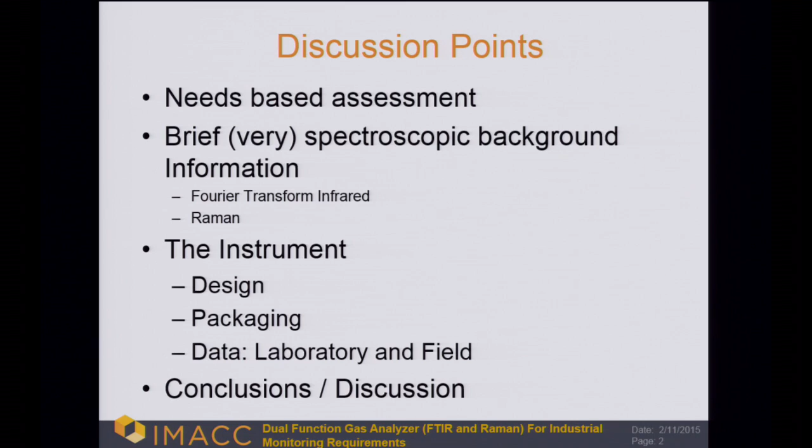We're going to talk about Fourier transform infrared and Raman, and then we'll talk a little bit about the instrumental design, some packaging, show you some data, and then we'll open it up for discussions. I was told that I don't have to worry about saying feel free to interrupt, but I'll go ahead and say feel free to interrupt, and then 3 hours from now we'll be ready to go.

So this is something I'm sure everyone in this room already knows, what the needs are. Here, nitrogen and hydrogen, our homonuclear diatomics we'll talk about. Being able to determine the calorific value, BTU, the molecular weight calculations, the density, what's going to the flare header as far as your composition, and being able to speciate a large number of gases.

Because everybody knows there are things like tunable diode lasers out there that can go after specific analytes. Is there a way to get a broad coverage of analytes in a single instrument? We believe that we can do that, efficiently and effectively, using both FTIR and Raman.

But here's what we really love to do. So whatever your concerns are, whatever your sampling environment is, whatever your analytes of interest are, we love to help you solve those problems. I like to joke that you can't come to us and look at our shelf and say, here's the UmptyQuat, this is what you need, this is all we got. We like to address each individual's needs and requirements and then meet those requirements. We're just kind of wired that way. We love to solve problems, hopefully not create any.

So I'm sure we've talked a little bit about this in this environment. There are things out there right now, flow meters and gas chromatography. I'm an optical spectroscopist, an analytical chemist by definition, but you really don't want me mixing chemicals. As far as gas chromatography, I like to refer to chromatographers as the separatists of the world, because it's separation science. I understand and appreciate what gas chromatography is capable of doing, and I'm not saying it's wrong, but we're looking for something a little bit faster and hopefully less costly in the long run.

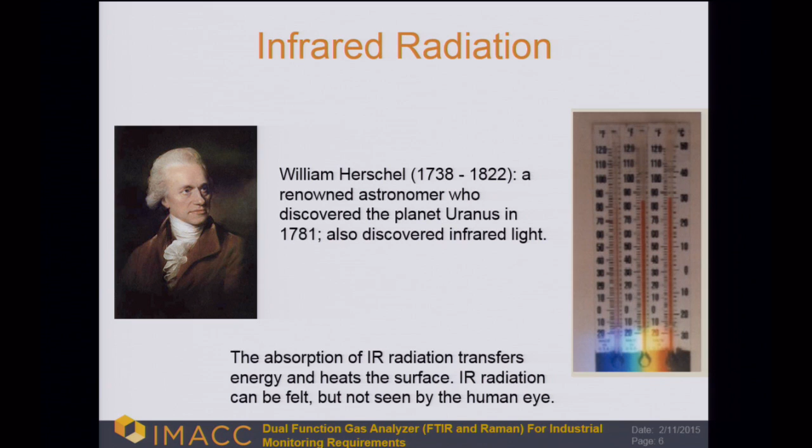So William Herschel identified infrared radiation by this simple test. We can feel it, but we really can't see it. Some people's eyes can go a little bit into the IR, but for the most part, we really cut off at the near infrared.

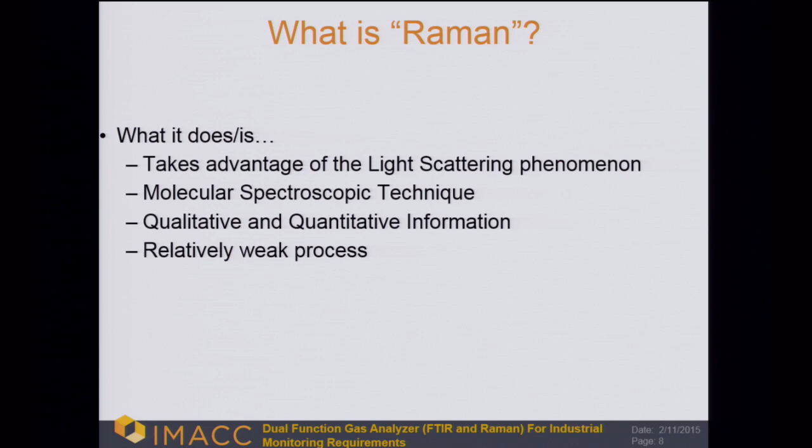Qualitative and quantitative, but it is a relatively weak process. The buzz phrase for Raman is only about 1 in a billion photons are scattered inelastically to provide that Raman information. But with today's technology, that's more than enough. Some of the data I could show you now that takes a minute used to take 3 days of continuous collection, but we've gotten a lot better in the quantum efficiency of our detectors and our laser sources.

You could have done this in 1928 and you would have won a Nobel Prize. This is how C.V. Raman actually discovered the Raman technique.

So, understanding the types of results that we get from Raman, there are 2 different main groups. One is the vibrational spectrum. The vibrational spectrum gives you your molecular fingerprint. It's very specific to each vibration as the molecules are put together.

This is cyclohexane, one of the standards I always use when doing liquids, because I know where all the vibrations are and can make sure they're calibrated. This peak right here at 801.8 is actually the ring breathing mode for cyclohexane, so it's the ring going in and the ring going out. So this is what a fingerprint would look like for a vibrational spectrum.

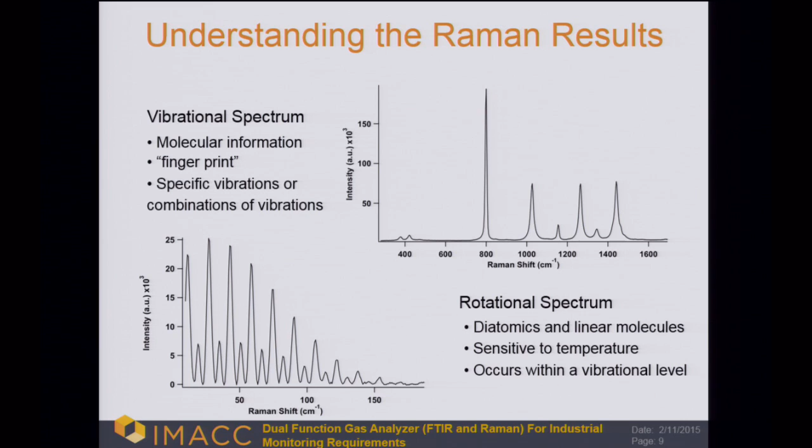With the exception of one homonuclear diatomic, and that's hydrogen. Hydrogen is unique, and it actually helps us in our quest to measure hydrogen using this particular phenomenon.

So, allowing me a little cartoonism here, if we think that FTIR active molecules are mainly asymmetric vibrations and Raman active molecules are mainly symmetric vibrations, if we have all the FTIR molecules in the world and all the Raman active molecules in the world, we will have this crescent here. And who lies in that crescent would be our homonuclear diatomics.

There is a crescent over here as well, but not relevant to this discussion, and I don't want to bog down too many details. But this is Raman only, and that's why we wanted to combine the 2 techniques together - not lose the sensitivity and selectivity of your FTIR, maintain that, and add not only these homonuclear diatomics, but this green overlap that's underneath the red of all the other Raman active vibrations, like carbon dioxide.

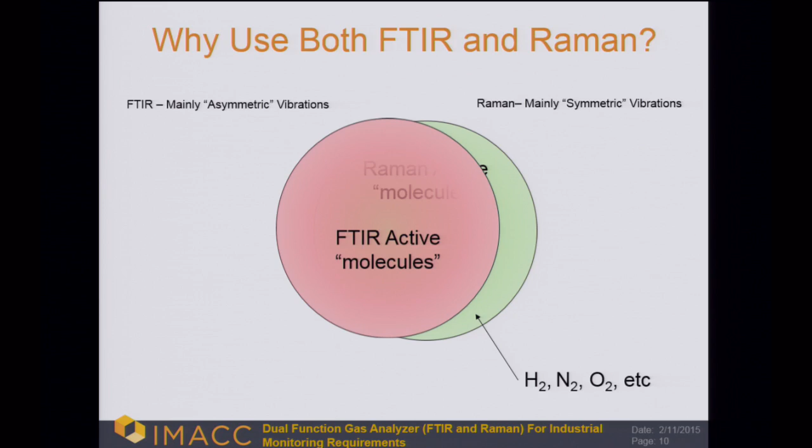So we have the technique. What's the solution? My idea was to take and steal Raman off an FTIR white cell, which is a long path cell, 10-meter cell. Not optimized for Raman, but we had them on the shelf. Can we still get Raman off of those cells and still maintain the capabilities of our FTIR using the same cell, which was the original path I walked down? One cell to do both.

It turned into this first unit, and I literally scavenged this off an instrument. I took these parts out of the trash and assembled it. And it worked. Somebody told me downstairs, sometimes the simple solution is the best solution. So get a wire brush, clean some parts off, put it together, and lo and behold, it actually works.

In this particular configuration, we were using one cell to obtain both FTIR and Raman from the same sampling volume, which is good unless in a 10-meter cell you have a high concentration of FTIR absorbing species, or IR absorbing species, because then they will dominate and absorb too much and you'll lose that spectroscopic fidelity using that cell system. So simple solution: 2 cells. That is also a possibility.

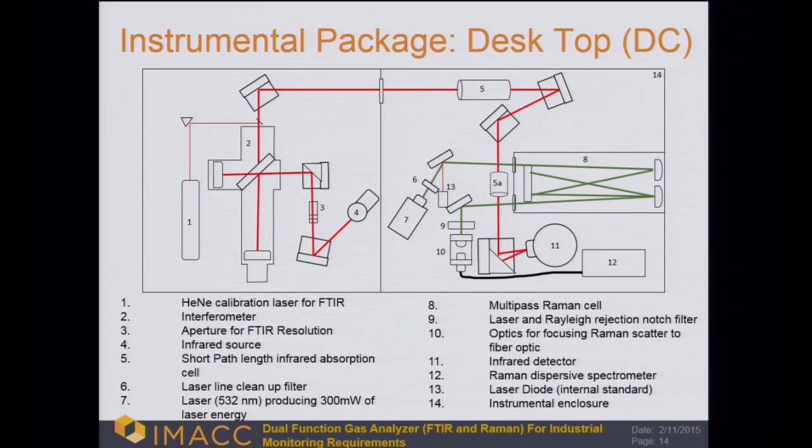So just like I always get accused of, if something works, I always tear it apart and turn it into something else and make it better. I'm never satisfied with leaving it alone, I guess.

So I took that system and put it into a rack mount system, mainly because there were some people we've talked to, footprint—it's all about footprint, right? We don't have the room for this thing to sit there. Can you make it vertical? Yeah. So can you make it class 1 div 2? Oh yeah, I think so. First step is to get it vertical.

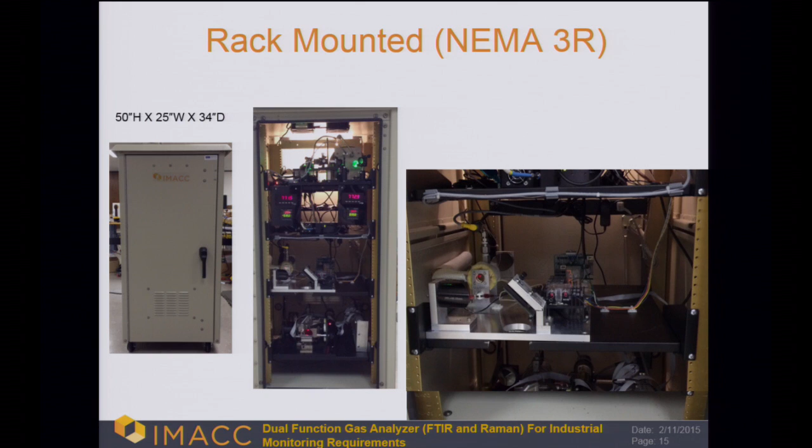So now we have this instrument downstairs. This is a 3R, NEMA 3R container. Each individual shelf has a component. The bottom shelf has my FTIR modulator and the electronics to drive it. The second shelf has my FTIR cell. Right now it's about a 5 centimeter cell for the high concentration application.

Our third shelf is electronics and gauges. You have individual temperature and pressure for FTIR and Raman, spectrometer, even a little computer. I don't know if y'all seen these little computers nowadays, they're phenomenal, only about yay big. It sits right back there and runs the whole system. There's one plug that comes out of here, plugs into the wall, and it's self-sufficient.

Up top is where all the Raman happens: your Raman laser, your internal standard laser, the Raman cell, fiber optic taking it down to the spectrometer.

And believe it or not, I don't have a degree in U-Haul moving, but have you ever walked across those ramps at a U-Haul, like 7 billion ridges per square inch, I don't know why. But we actually rolled this across there, rolled it in, put it up, and started it up, and no change in calibration whatsoever, no shifts at all, which I was very happy for. I expected to get some shifting, but just powered it up and she started rolling with no problem.

So what does the data look like coming off to the user? I love this slide because it helps illustrate the difference between an IR vibration and a Raman vibration, since this is collected simultaneously. On this side is my IR, and on this side is my Raman. You can see I've taken the background—there's my background single beam, and there's my absorbance spectrum. My FTIR has no clue that anything is in the cell right now.

I am flowing 100% nitrogen, so there's my Raman nitrogen peak at 2331, while FTIR does not see it. This is just the way I like to illustrate the selection modes or criteria for the two different techniques using this particular slide.

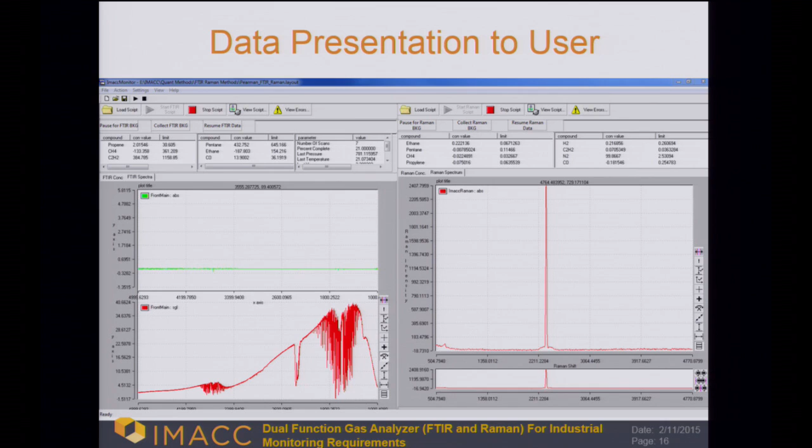So, great, it works. It works. Can we then prove it works using more laboratory data? Well, these are some of the analyte sensitivity graphs for the hydrogen, oxygen, and nitrogen.

And you actually would expect this deviation in the slopes because there's a thing called a Raman cross-section, which is a contributor to the strength of a Raman signal. The Raman cross-sections - hydrogen has the greatest Raman cross-section and it goes down from there, so you would expect a greater change, like you do see in this graph.

And this also allows us to go back and make sure that our spectrometer, our laser system, and our optical paths are still operating at where we built our calibration curves, by having this as our benchmark.

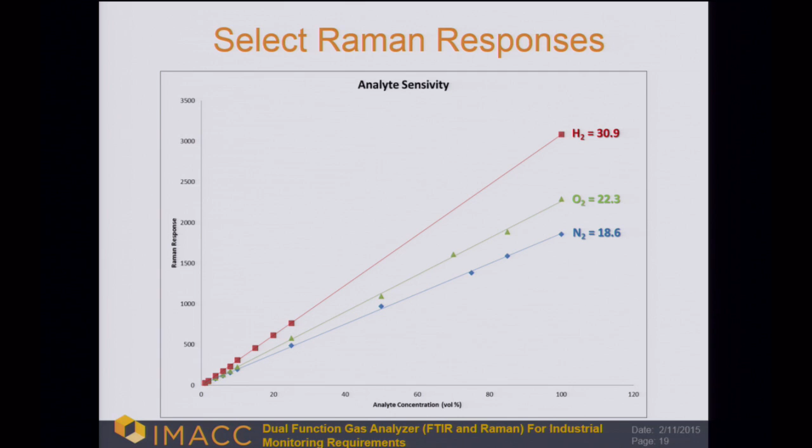So luckily, we had some friends up in Palatine, Illinois, near Chicago, and they allowed me to pack an instrument up and ship it there. They had this gas standard on hand with these constituents, and used the HOVACAL to blend the hydrogen into this, so we had a multi-component mixture going simultaneously.

We diluted it using the HOVACAL and the hydrogen to attain 5 different concentrations, and we were curious, once we built the calibration curve of the Raman response versus the HOVACAL response, to test it against the GC. That sounds great, so let's give it a shot.

So, lo and behold, if you calibrate the Raman instrument to another instrument, or in this case another capability like the HOVACAL, it gives you exactly what you would expect to see. Okay, great - you're not learning anything here. You calibrated it to what you use, so you should get the same response.

And we did. I said, okay, so great, it's working great, cold fusion - let's hold a press conference. Let's check the GC. Oy. Who put this slide in there? Okay, so what did we do wrong?

We did something wrong, but still, it's 0.96 to 0.99. Yeah, I'm saying that's pretty good. Trying to make ourselves feel better.

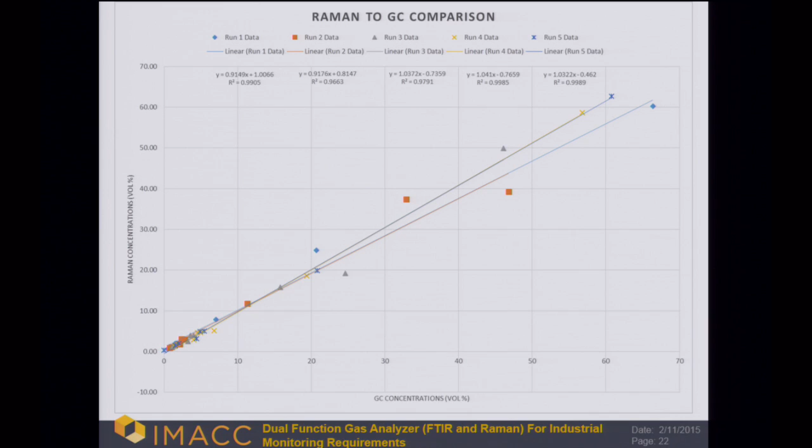There you go. But we actually found out that the calibration for the HOVACAL with the hydrogen was off. So we went back, redid the data, and ran it again, and lo and behold, that looks a lot better - 2 nines, not bad. So we are at least as sensitive and selective, I believe, as a GC. It looked pretty good.

So I said, okay, all these people have all these GCs, well, they don't want to get rid of them. So what if you used a GC as your QA/QC check, and then let the Raman run? You only run your GCs every once in a while.

And if you do that, okay, same thing as before, it does seem like a viable opportunity for you to check and maintain your response from your Raman FTIR system.

Now, why would I need that if I got the GC? Because I'm collecting data every minute or 30 seconds, depending on your concentration levels, and I don't have to change my columns because I don't have any.

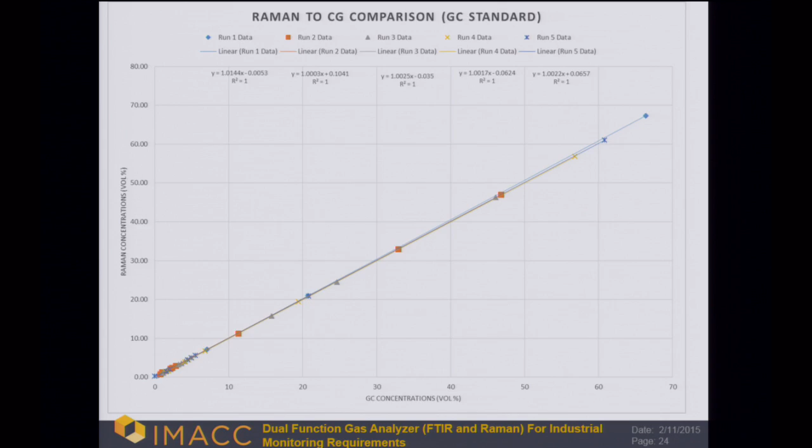So, great, it worked in the lab. I've almost convinced you it works. Then we take it out into the field, in what I call the shakedown cruise.

You see the same species every single one: carbon monoxide, HCN, methane, water, ammonia, not hydrogen, in the FTIR spectrum. You do not see the hydrogen, the nitrogen in the FTIR spectrum.

So this is what I was talking about before. Hydrogen is one of those unique species where you have easy access to the rotational lines as well as the vibrational line. And that does a great service to us using a TE-cooled detector, because the response curve of most of these detectors is kind of a parabolic curve. And these guys are at either end of the curve, so it allows you to flatten out your QE or your response by ratioing and analyzing either side.

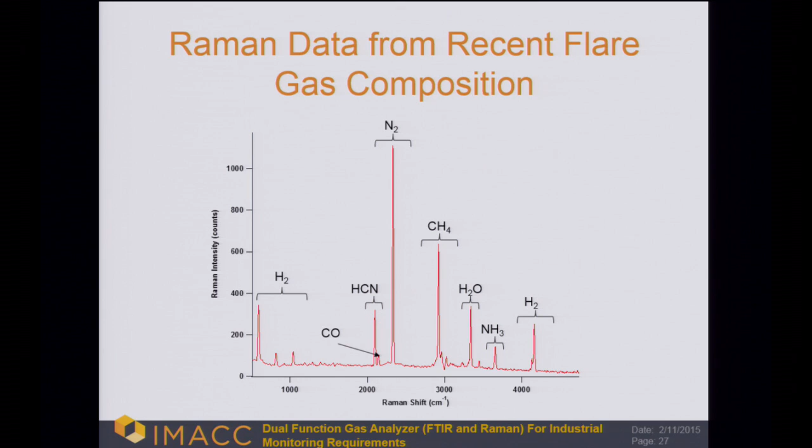Okay, conclusions. We did have a theoretical design. We did test it on bench, laboratory, and a field environment. We have a couple more planned to go out there and use this instrument some more. It does provide some interesting capabilities - again, 1-minute time average data coming off the instrument, or less, depending on concentrations. And it does allow us to monitor and measure all species simultaneously.

Now, what I will say, because it may come up, is Raman sensitivity. What you're going to get as far as limit of detection using the Raman only is about 0.5%. It's probably the best we're going to achieve right now. With FTIR, it's in the low ppms.

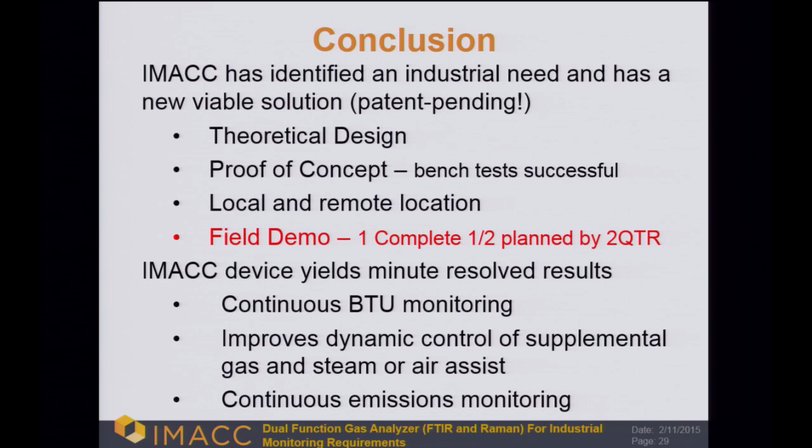So that can be improved. I can go lower on the Raman if I was to build a Raman-specific cell, which I had the designs for, just hadn't really put it together yet. So when it comes down to 0.5% or 1%, I was told that really that's not a big deal. So if it is a big deal, we do have the capability of going lower - I just don't know how low we can go.

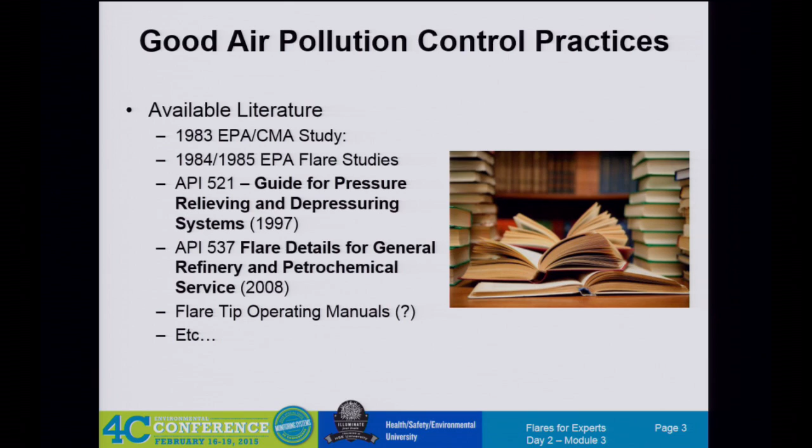When you look at how do you determine flare performance, you have a couple of obvious choices. Visible emissions.

Oddly enough, a smoking flare is not an inefficient flare. A smoking flare is actually a highly efficient flare in terms of combustion efficiency and destruction removal efficiency. Those are the other two factors you can look at for flare performance.

But how do you measure those? In theory you can look at a flare and tell if it's smoking or not, but how do you measure combustion efficiency? How do you measure destruction removal efficiency? We've talked quite a bit about a smoking flare already, so I'm not going to go too in-depth into that.

But combustion efficiency - when you have a flare, you have an open flame in the atmosphere, you can't really measure the emissions coming off of that. So that leads us to this concept of surrogate parameters. That ranges from exit velocity based, where you see the tip velocity we've been talking about in Subpart A, and also this concept of momentum flux ratio that's in the consent decrees, and fortunately not in MACT CC.

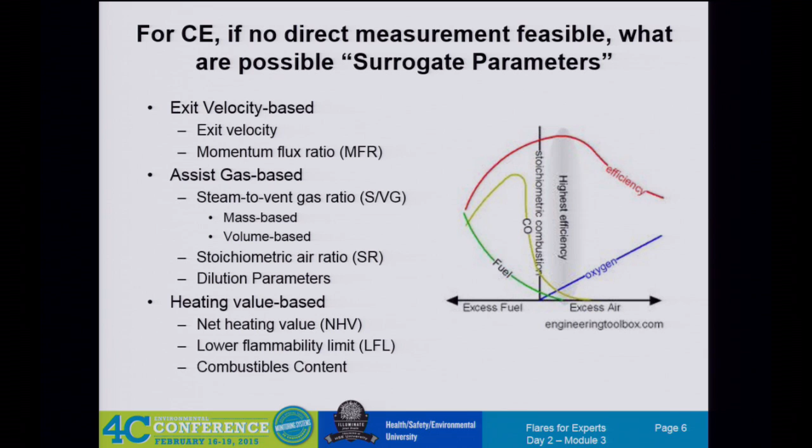You have assist gas based surrogate parameters, and those are your steam to vent gas ratio for your steam assisted flares. The consent decrees and the OAQPS document introduced this concept of the stoichiometric air ratio, and then MACT CC introduces these dilution parameters that were kind of totally out of left field when that was published. And then you have your net heating value based parameters, which is the net heating value, the lower flammability limit, or your combustibles content as we see in MACT CC.

As far as exit velocity based parameters go, these are based on studies from the 80s, and there are concerns about the scalability of the test. These were done, some of the studies this information is based on, were more or less Bunsen burners. So their scalability to large industrial flares is questionable.

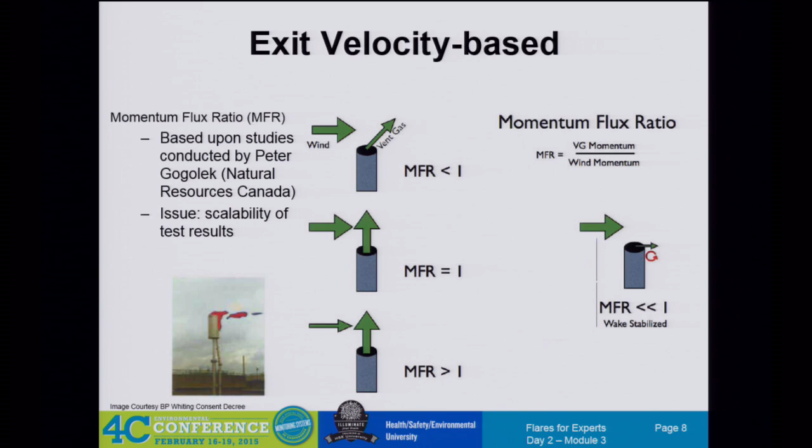Hopefully this will be the only time I talk about MFR. This is just the evolution of the exit velocity-based surrogate parameters, and the numbers here are somewhat nonsense because the MFR limits set in the consent decrees are actually 0.0030. So calling MFR greater than or equal to 1 is somewhat nonsensical.

But combustion efficiency - now combustion efficiency looks at the effectiveness of turning the hydrocarbons in your flare vent gas stream into carbon dioxide. So in the numerator, you have your concentration of CO2. In the denominator, you have your concentration of CO2, CO, and your unburned hydrocarbons in the plume. So that denominator constitutes all of the carbon that should be in your vent gas stream, whereas the numerator just looks at the carbon that's been fully oxidized all the way to carbon dioxide.

Whereas destruction removal efficiency looks at - if you had 10% propane and you measured only say 1% propane in the plume, that would be a 90% destruction removal efficiency. It doesn't matter what that 90% of propane that disappeared went to. It could have gone all the way to carbon dioxide, it could be CO, it could be random other hydrocarbon species in between. All it cares about is that it's not propane anymore.

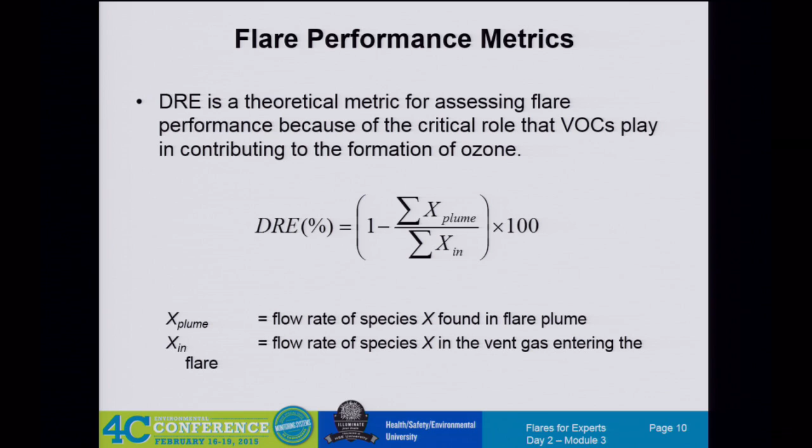You just talked about the destruction efficiency - yeah, the two different terms there, destruction efficiency and combustion efficiency. And from the regulatory perspective, how do those fit in? Well, the goal is 98% combustion efficiency. And oddly enough, we talk about this a little bit in the AP 42 module that we may or may not get to this afternoon.

But in the changes that have been made to AP 42, the EPA has actually shifted the emphasis from destruction and removal efficiency to combustion efficiency in one of the spots. So that's been the shift towards that.

It shows up in your permits because over the years we weren't that precise with our words, right? So some permits use combustion efficiency, most use DRE, destruction removal efficiency. They just use the acronym DRE. Really, it only should apply now to an incinerator, a thermal incinerator, some type of incineration device where I'm adding fuel, creating a firebox, and trying to destroy what I'm sending through that incinerator. We have to work at keeping the distinction.

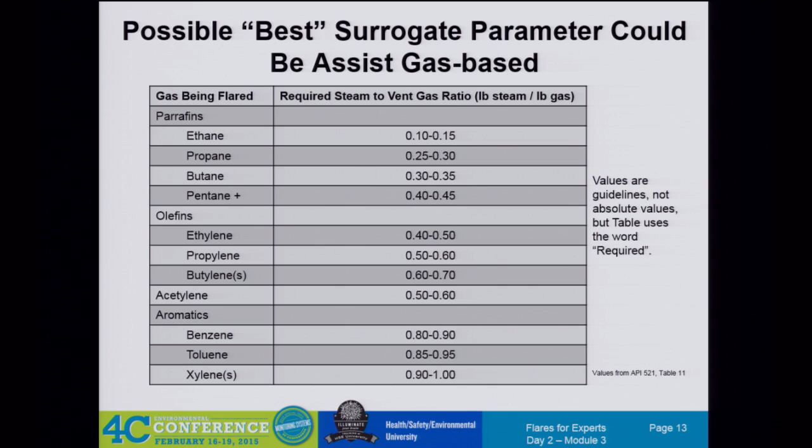Is anybody on the API committee just to help change that word? It boggles my mind after all these years that we still can't seem to get API to change 521.

Well, it's interesting, if you see the word 'required,' you have to ask required for what? EPA will say, well, since it's required, if you're over this, your combustion efficiency is affected. Well, this isn't about combustion efficiency, this is just about smoking, this is visible emissions essentially.

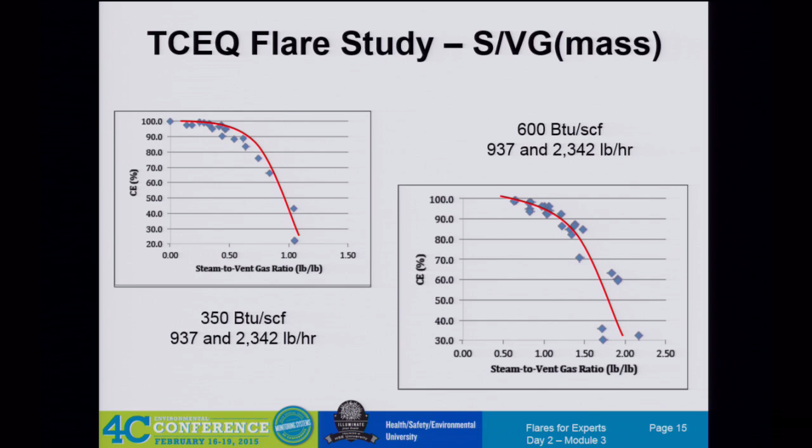When we turned the steam off at 350, it did smoke, to my surprise. Yeah, because it is a pretty large diameter flare. So, but at minimum steam, it was 46%. And then on the 8-inch flare we did at 300, it didn't smoke, it was marbled. So it just depends on the flare size and the dynamics of what's going on.

So let's see, again, we've talked about this already, but the goal is to operate as close to that incipient smoke point as possible, because that's the most efficient point of combustion. You get excellent combustion efficiency right at that point.

In addition to the steam to vent gas ratio, you also have the stoichiometric air ratio that OAQPS has talked about. It's a direct mass to mass ratio, looking at the amount of air supplied to the flare tip and the amount of oxygen in that air supplied to the flare tip.

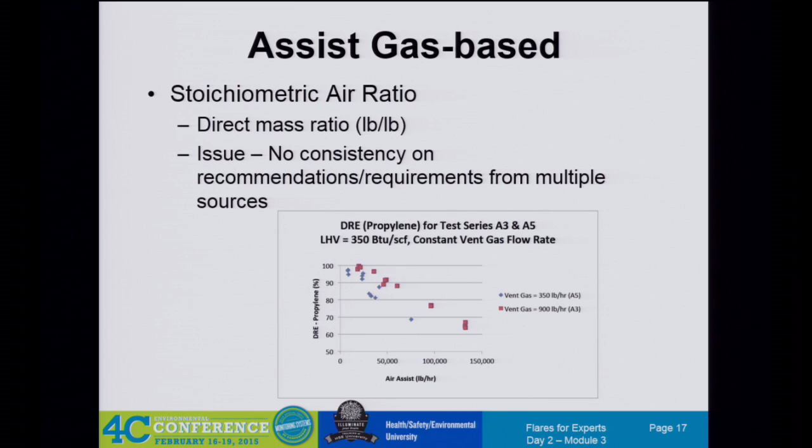Those are the wrong units, sorry, BTU per scuff in there. Obviously premix air. I'm kidding, I don't know what premix air is. I don't know, Russ, did you guys use premix air for that? I don't know. Nobody sees what that was. Yes.

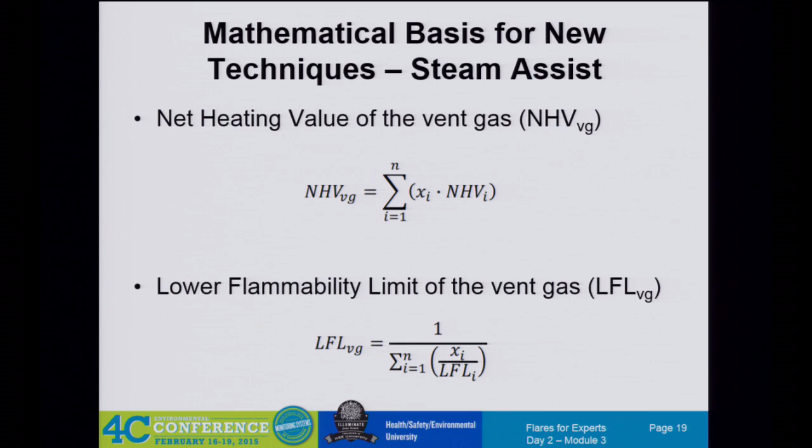Okay, we've talked about this drawing already, the various spots you can look at the net heating value of the gas. Now we're going to walk through some of the equations. Most of you will have seen these before, so we'll go quickly. First is the net heating value of the vent gas, which is the summation of your various components in the vent gas and their individual component net heating value. Then you also have the inverse of that, which is the lower flammability limit of your vent gas, which takes the composition, divides by the LFL of their components, and then sums that under 1.

One other thing to note is the 2 different heating values for hydrogen. 274 is the actual net heating value of hydrogen. 1212 is the effective heating value of hydrogen, which takes into account the flame speed of hydrogen and the fact that it burns well and tries to boost the combustion of the hydrocarbons.

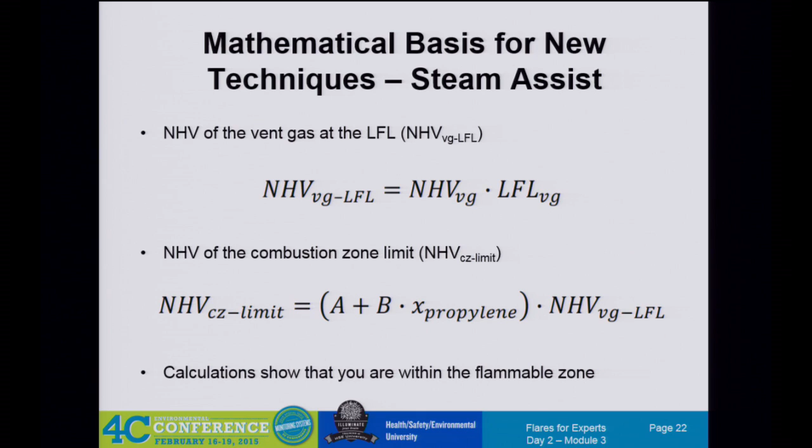It's not quite the right slide.

Next slide. But anyways, those combustion multipliers are in part based on this propylene hypothesis, and we've touched on this a couple times. This is the idea that especially when you have olefins and hydrogen in the same vent stream, stable intermediates are formed during the combustion process, and this prevents complete combustion.

When does this slide come back to bite us all in the ass? Yeah, we're just reporting the data. It's not my flare. Yes, it's a hypothesis. It's an idea.

More testing to come. So here are your combustion efficiency multipliers. It's based on your minimum steam addition, whether you're below 1,000 or above 1,000, and whether your VOC concentration of your vent gas is above or below 20%. It's worth noting that methane and ethane are not considered VOCs.

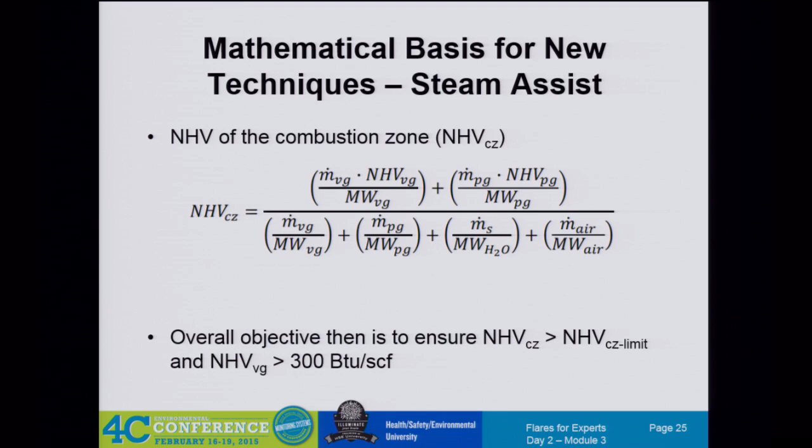Yes, these bottom two terms are the steam and air. This is fairly similar to what we've seen in MACT CC. From a consent decree perspective, your overall objective has 2 points: one is to make sure that your net heating value in the combustion zone remains above the limit you've calculated as we just went through, and the other is to make sure that your net heating value in your vent gas remains above 300 BTU as required by subpart A. Our experience is if you've got the first, the 300 is easily met - you're way over 300. Usually. There can be scenarios where that's not the case.

Has anybody argued that if you have the net heating value, you don't need the 300 in the vent gas, so we should just dump that? I don't know if anybody... The negotiator is arguing that point. Yeah, there's no reason for both. The 300, at that point, is irrelevant because you've proven the combustion efficiency at the tip.

So with future consent decrees, do you have any idea whether these calculations will stay, or will it move more toward the RTR calculation? It's a good question. Refineries are largely out of the consent decrees now, there's probably a few stragglers still to come, but they seem to have focused now mostly on the chemical side. So it's a question of whether the chemical side will differ significantly from the refiners. Chemicals might be a slightly more consistent vent gas stream because they're coming from specific units, they know exactly what it's going to be. But to this point, it's hard to say for sure.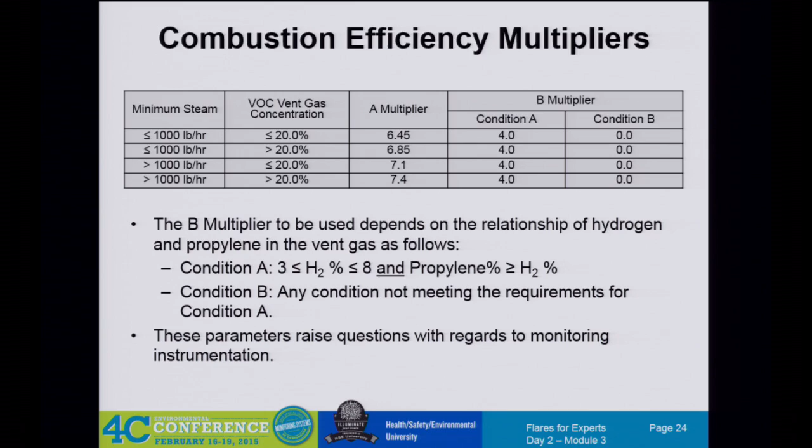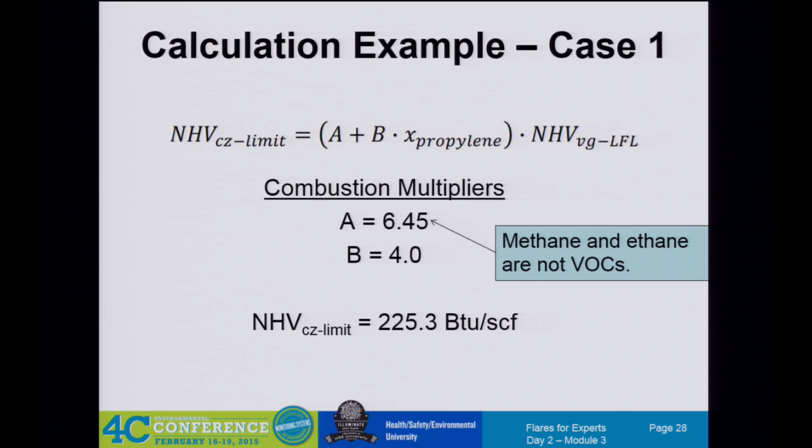Now to calculate your limit, you have your combustion multipliers here. Remember, methane and ethane are not VOCs, so that means you have a limit of 225.3 BTU per SCF. Well, except, was there any propylene? There was propane, I believe. Oh, so you don't have the multiplier then? Ah, crap, I've got a ways to go back, I guess. You have the A, or you have... Yeah, that's if your propylene is... Well, you have the A multiplier, but your concentration of propylene just falls out because the concentration's 0. Yeah, so then you're under condition B. Oh yes, so there is no multiplier. You are correct. Yes, that is correct, that should be 0. It doesn't change the equations because it's still 0. No, it lowers your limit though. Yes, your NHV changes? No, because your concentration of propylene is 0. Oh, so that falls out, I see what you're saying. You're right. So, but anyways, there you have your limit.

That gives you a net heating value in the combustion zone of 591.2 scuff. There's supposed to be something else there, which is great - it means you're above your limit. You're awesome.

However, and this touched on a little bit during the MACT CC discussion - what if you have a system with flare gas recovery? Your minimum flow to the flare is just your purge gas through the flare tip, so you're assuming a minimum natural gas purge flow rate.

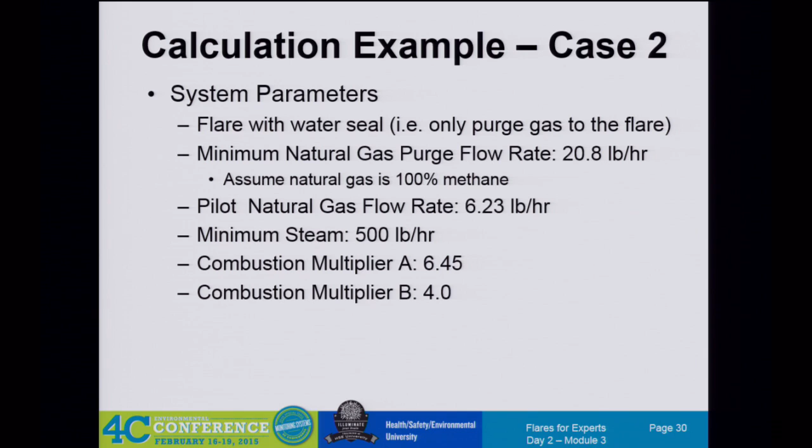Pilot gas - most of this stays the same, which gives you net heating value in the vent gas. We'll assume methane at 896, LFL of 0.05. Your vent gas LFL goes to 44.8 BTU per scuff.

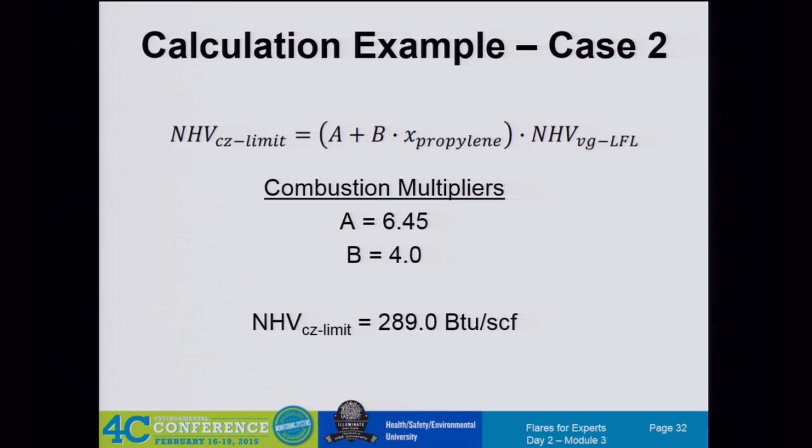Now here's where it starts to get different. When you use those numbers to set your limit, it comes out to 289 BTU per scuff, and this is where you find your problem. Drop your air out - you have your mass flow rate for your vent gas of only 20.8 pounds per hour, and that's taking, I think, 500 pounds scuff per hour of natural gas.

Then comparing that to your 500 pounds per hour of steam, you have a steam to vent gas ratio of 24.1. Not so good. You have a net heating value in the combustion zone of 52.6. Also not so good.

If you look in the consent decrees, there's a table in one of the appendices where it lists the expected combustion efficiency at various net heating values in the combustion zone. If you're below 60, it says you're getting no combustion. So your combustion efficiency at this point is 0, based on that table in the consent decrees.

That's if the steam is influencing that point. Yes, they were saying that everything's completely met. Yes.

So how do the consent decrees handle this? Or do they just say you have to boost fuel gas downstream of your... There has been much gnashing of teeth over trying to figure out what to do about that.

The negotiating tactic has always been, if it's a flare gas recovery with a water seal, during those periods of non-flare use, the calculations don't apply. So that's the argument - we try to argue that the net heating value in the combustion zone, there is no combustion zone, so I don't need to maintain the NHV over the limit.

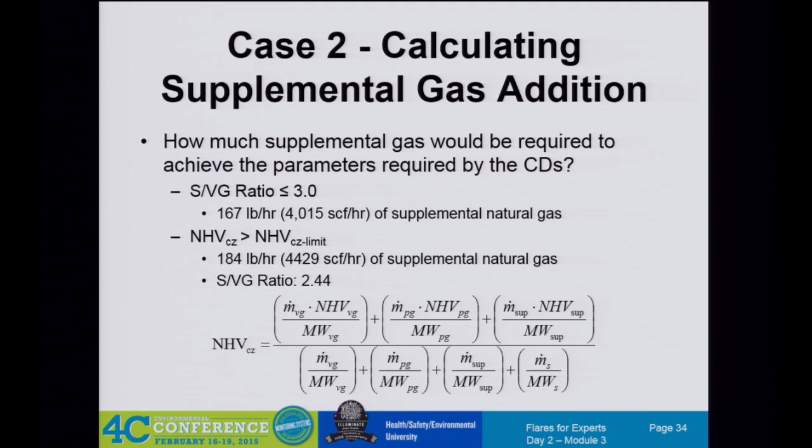Now we're going to look at this a little bit, this is where I have some fun because my background is chemistry, so we get to go through some stoichiometric equations and whatnot. What the stoichiometric air ratio is looking to do is determine the molar oxygen demand for the vent gas going to the flare, and then make sure that you don't exceed the limit. The limit is defined in a couple of different places, differently.

The BP Whiting consent decree, which to this point has been the only one to directly address an air-assisted flare, set a stoichiometric ratio of 10. OAQPS's document set a limit of 7. And a third document set a limit of 6, if I recall correctly. Was it TCEQ? I couldn't remember.

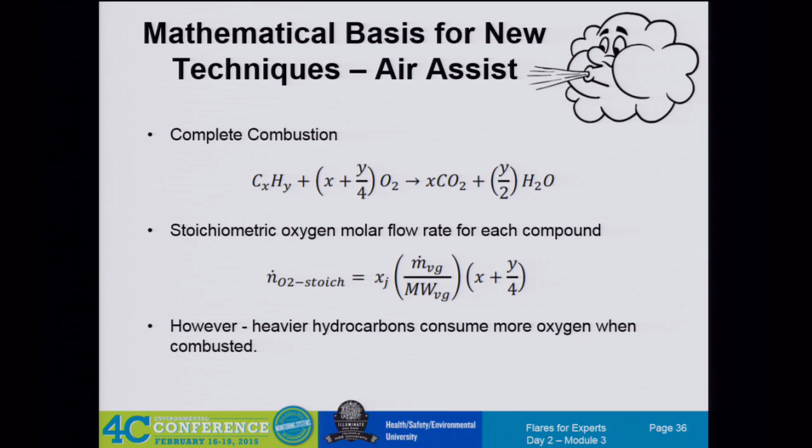You can make an argument for being able to use a calorimeter to do the previous equations. But in order to do this one, since the X term here is dependent on what your constituents are and what the molar oxygen demand for combusting that particular component is, you really need a breakdown of all the different components to do these calculations. What this formula shows you is that the heavier hydrocarbons, if you remember back to general chemistry or organic chemistry in college, require more oxygen to go to complete combustion.

By the way, this is why it's a little confusing to have a BTU analyzer on an air-assisted flare. Because the BTU analyzer will give you a net heating value, but will not actually tell you anything about the oxygen. Without knowing the constituents, you don't know what the actual oxygen demand is for that gas.

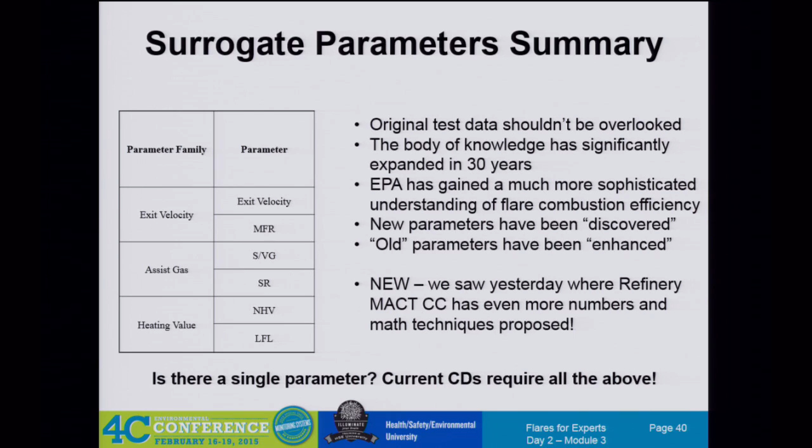So, summary of the steps for an air-assisted flare. These are your surrogate parameters, we've just walked through each one of them. And then we saw in MACT CC, we have even new ones. This is where MACT CC comes into play. MACT CC has the net heating value in the vent gas, the net heating value LFL, and then the combustibles content in your vent gas -- that's the new term. That's the total volumetric fraction of hydrogen and combustible organic compounds present in a flare vent gas by volume fraction. We'll look at that a little bit more here in a second.

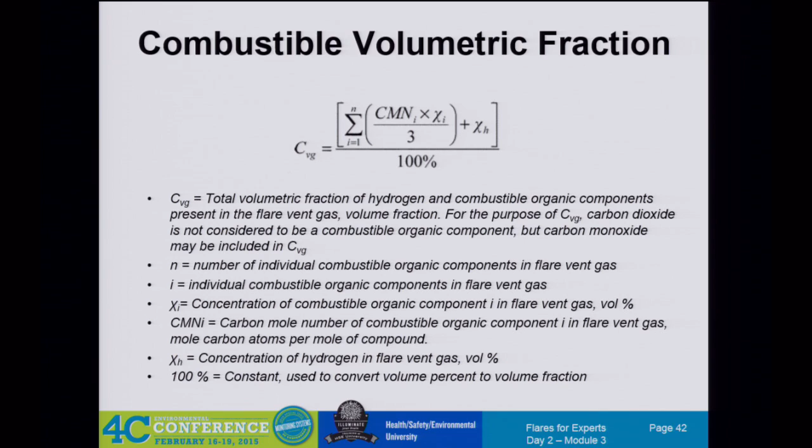Now it raises the question though, if you have a THC analyzer, which is just say an FID, burning the gas as it goes by and measuring the ionized carbon atoms, you have no way to get that hydrogen number. Meaning a THC analyzer is really difficult to use here unless you're just going to forfeit that benefit of the hydrogen in your vent gas. So something to think about.

Here are your operating parameters. Troy talked about these earlier, so I won't go into great detail here. One thing I did want to point out is the dilution factor that MACT CC introduces: the larger your flare, the more it helps you. We don't know the data, we would love to see the data, but that's really interesting, and that may be the case. So as your flare increases, an 80-inch flare is potentially more efficient according to this than a 24-inch flare. It's a very interesting element of the equation. The same thing holds true for the LFL and the combustibles content.

All right, so we went through that one really fast as I could. We have about 15 minutes until the next break, so I'm going to keep trying to go through the control strategies. This is a fairly short module, so I may actually be able to finish it before break—I have a habit of overpromising. As long as you don't under-deliver, you're fine. That will allow us, when we come back, to have Scott and Dan talk about combustion efficiency performance testing.

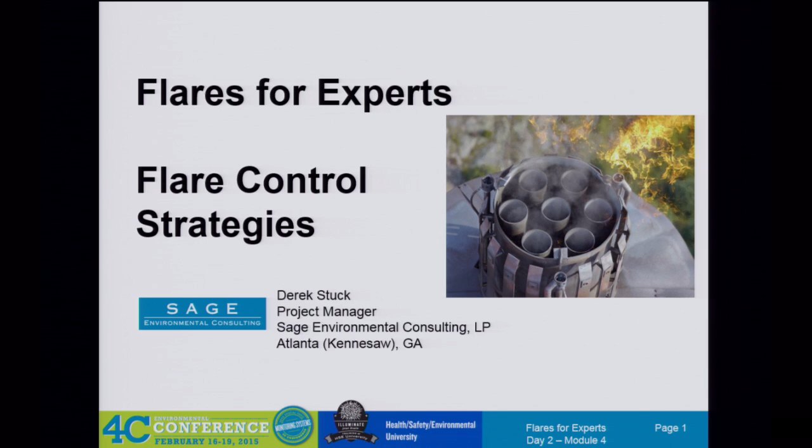So now that we've looked at how we calculate the stuff from a flare header, we want to talk about controlling those parameters for the flare. This is another one of those cool drone pictures, by the way. So in the control system, what are we looking to control?

We have no great control over the flare vent gas flow—that's going to be what it is, a product of either emergencies within a refinery or chemical plant, or just process control, and the sweep flow rates. However, you can control your steam and air flow rate, and that's really your key element here. So we're looking at your steam and air flow rate and your addition of supplemental gas, to automatically adjust for the net heating value of the combustion zone, your steam to vent gas ratio, and maybe even your dilution factors that MACT CC has introduced.

The consent decrees have required these parameters to be on an automated control system, meaning the consenters have a steam flow meter and a vent gas flow meter. They're pulling data into the DCS system, coming up with a steam to vent gas ratio, and trying to maintain a set ratio. The way most consenters have set this up, you can change the ratio and not be out of automatic control—meaning you can change the ratio from, say, 1 to 1.5, and that doesn't constitute taking it out of automatic control. Instead, it's only out of automatic control if you literally flip it into manual and manually set the flare flow or the steam flow rate.

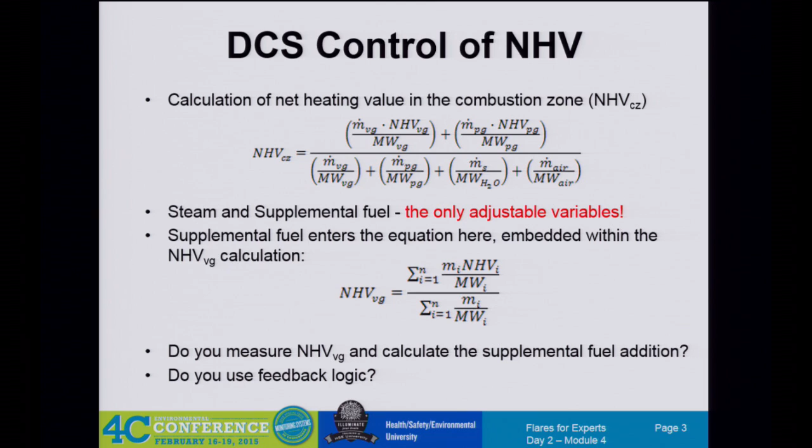None of this is required under JA. JA does not deal with control of the flare—it's only monitoring. So just leave JA in the dust right now. We've just went through all of this: steam and supplemental fuel or air are the only adjustable variables. And how do you calculate this need for supplemental gas? How do you decide how much you need to add in order to get above the required values?

In order to do these calculations, you typically need the molecular weight, and this is where it becomes beneficial to have that molecular weight from the ultrasonic flow meter, because it continuously gives you that information. Or you can use a gas composition analyzer and do it through those calculations. Otherwise you've got too much variability, you can't guess.

Typically under the consent decrees, the steam to vent gas ratio has been on a mass basis. The Marathon consent decree allowed a volumetric ratio, but everyone since then has been mass based. So you can't do mass without the molecular weight.

For instance, the optical meter doesn't give you that molecular weight, so you're stuck with volumetric at that point, unless you have another molecular weight source, like a GC. It can give you a number, but the GC is going to be more prone to problems when you have upsets.

A Panametrics device can give you that molecular weight even if your GC goes down. You can still keep control of steam to vent gas even if the GC's out. The GC is also going to have lag issues where it's only going to give you a result every 10 minutes or so, and composition can change rapidly.

By the way, this is one of those interim steps EPA will ask you for during your consent decree discussion, before you actually sign. Before you install your analyzer, they're going to ask you to consider an interim step, and being able to use the molecular weight off your panametric flow meter linked to your steam valve will give you at least some steam to vent gas control, and then you can work on that heating value once you add the analyzer.

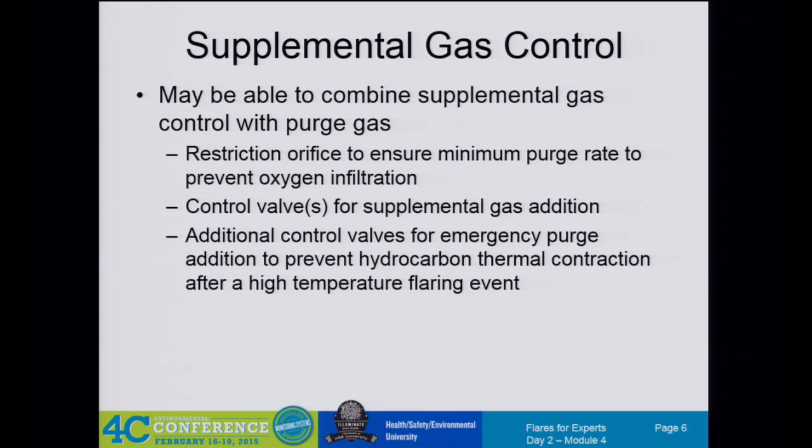Okay, so for supplemental gas addition control, you have two criteria you're trying to meet here, three really if you add in the MACT CC requirements. We just talked about how the net heating value in the vent gas may no longer be absolutely necessary if you're controlling based on the net heating value in the combustion zone.

But in the consent decrees, your compliance period is a 3-hour rolling average. MACT CC now uses a 15-minute block average, and that's a much faster required response time for your system.

Because if you have a GC with a 10-minute run time, your GC is going to run for 10 minutes and spit back out a result from 10 minutes ago. You're suddenly going to go, uh-oh, I need supplemental gas. Problem is your GC has already taken another sample at that point, so you won't actually see the results of adding that supplemental gas until the next run, really 30 minutes after the initial event. That's the problem of flare control using a GC in a nutshell - you cannot respond to an event in real time.

You can maybe respond to an event if you're in communication with your operators. You say, well, we're about to purge out a vessel with nitrogen, so add in supplemental gas to make sure the net heating value doesn't drop. But in surprise events or emergencies where something happens that causes the heating value to drop, that's not going to be the case.

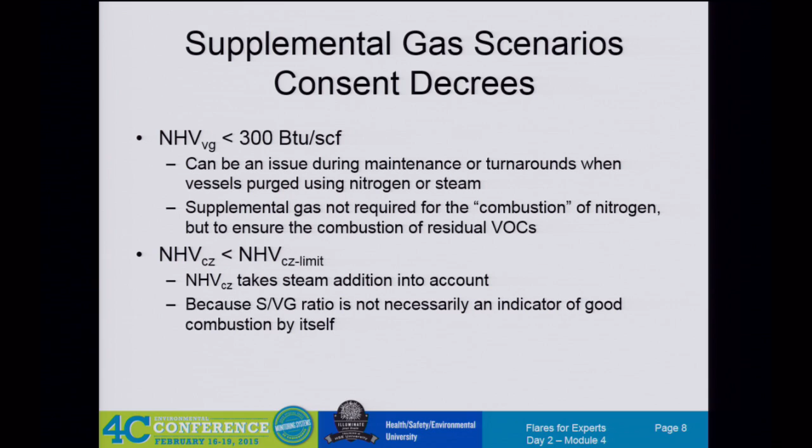So with that, we have talked about these - I will not necessarily go through them again. So you're setting the net heating value in the combustion zone. These are the calculations we've just walked through - step 1, step 2, condensed into 4 steps instead of 7. From a MACT CC perspective, your step 1 is determining your net heating value in the vent gas.

And then you have some options, because MACT CC currently has 3 different parameters you can comply with. You don't have to pick one and stick with it - you can change it based on the profile of your vent gas. If for one period your net heating value in the combustion zone shows you're in compliance, fine. If another, your LFL shows you're in compliance, that's good too. Or you can use the combustible content - any of those at any time can work if you have the instrument that can measure that.

So that's the key - having an instrument that allows you the flexibility to use any one of the calculations, meaning your DCS system or a data handler outside of your DCS is constantly doing these 3 calculations in parallel with one another, monitoring each one. It may turn out, by and large, that if one's in compliance, they're all in. But that won't always be the case - there will be scenarios where that's not the case.

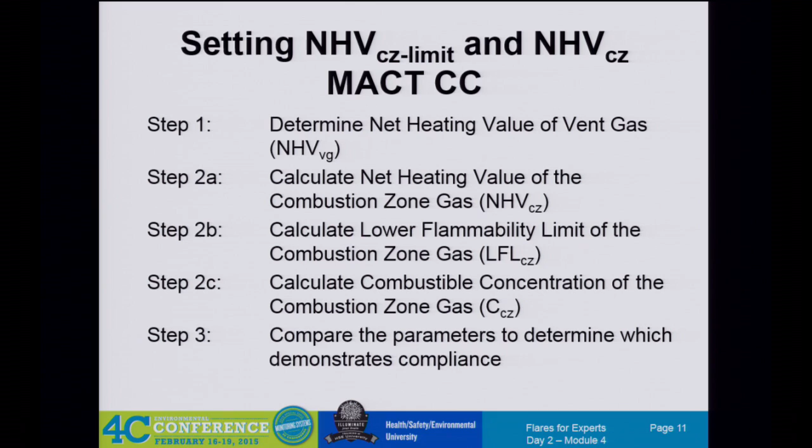So steam control - you do have a minimum steam set by the tip manufacturer, and unless the tip manufacturer says it can be decreased, you risk damaging the metallurgy of your flare tip if you don't supply that minimum steam.

From a steam control perspective, we talked about control valves for the supplemental gas. From a steam standpoint, typically you want 3 levels of control: a restriction orifice doing the minimum steam requirement, a small control valve for trim adjustments for normal fluctuations in flare flow, and a large control valve to supply the full steam capacity to that flare tip in the event of a large upset.

So that is what we've seen commonly.

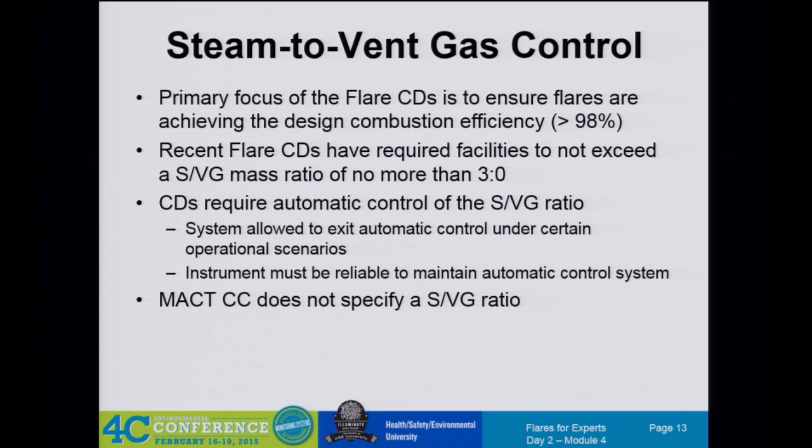So the CDs require that automated control of steam to vent gas ratio. MACT CC does not specify that steam to vent gas ratio. So we'll just keep on moving.

DCS control of steam to vent gas ratio. I talked about this a little bit at the beginning.

So I have like 3 more slides, so I'm going to push through and finish up. You got 3 minutes, that's great. Awesome. Troy said 3, and I didn't know if that meant it was 3 or if I had 3 minutes.

One of the problems you can encounter is if you're trying to control steam to vent gas ratio, and you're trying to control for the net heating value, they can walk each other up if you're not careful. So if you have an increase in vent gas flow, and you have a set steam to vent gas ratio, as your vent gas flow increases, your steam flow also will increase.

Now what will happen is if you're also monitoring the net heating value in the combustion zone, that additional steam will cause that net heating value in the combustion zone to drop. And that will trigger the addition of supplemental gas, which will further increase the vent gas flow, depending on where your instruments are positioned, which will then increase the steam, and then you repeat the system.

And eventually, if you don't have control or logic controls in your control system, you max out your steam and your valves - you have 2 valves 100% open, and there's no telling what's going on at that point.

So you need to make sure that you either have a control system set up where it's subtracting out that flow of supplemental gas from the vent gas flow meter, or somehow making sure that the steam addition - you don't add steam for methane. Methane is typically not going to smoke.

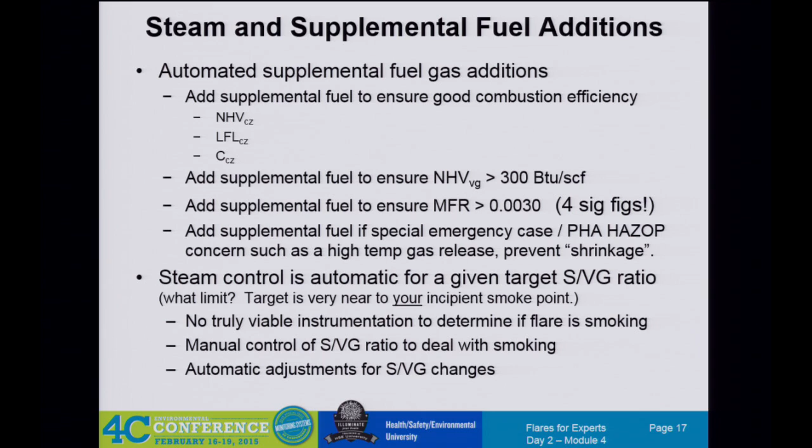We've walked through all of this. One thing to note, there are instrument manufacturers who will try to sell smoke detecting systems. We have yet to really see one that works. If we see one that works, that would be awesome, but we've yet to see it if it exists.

Here's the incipient smoke point. I had a few more slides than I thought I did.

One thing that Sage has helped several clients do is we've developed what we call DCS calc manuals, which take all of these calculations, put it into a narrative form, trying to help the system integrators understand what they're doing and trying to bridge the gap in between the rules and the consent decrees and the actual programming side of things.

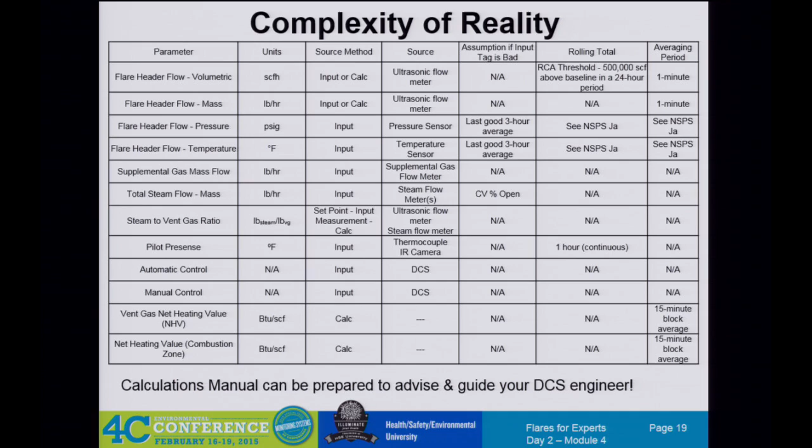And everybody configures this differently. So it really is a worthwhile exercise to figure out where all these little electrons are going - where's the data path? And one thing we've seen a couple of sites start talking about is instead of doing these calculations within your DCS, do it external to your DCS.

Do the calculations external to the DCS and just spit back the numbers the DCS needs to control the system. Does it need supplemental gas? Yes, okay, how far does it need to open the valve? That's all it needs to do. You don't need to slow down your DCS doing all these calculations and bog it down with all the data handling.

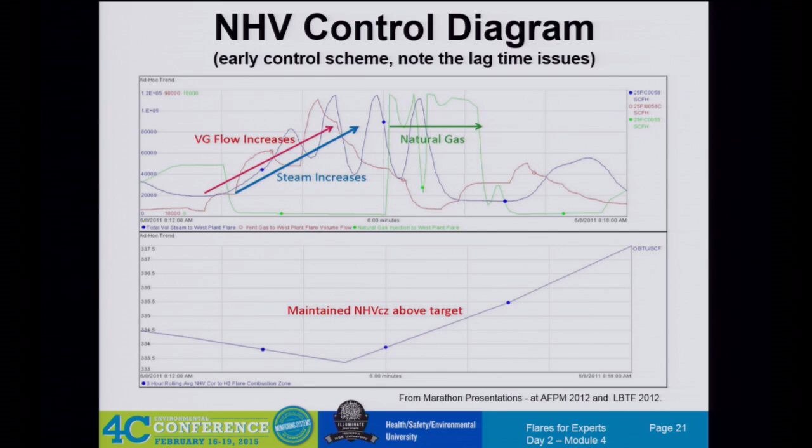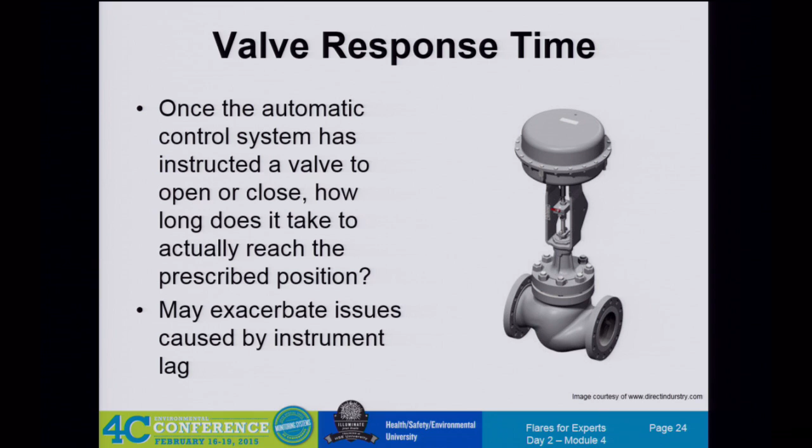So, just a few quick issues with flare control. We've talked about instrument lag, the issues with GCs and how slowly they get the response back to you, which makes control very, very difficult. Valve response time - just because you've told a valve to open doesn't mean it necessarily opens instantly. It takes a minute to open to whatever percent it's set to, and this could end up exacerbating issues from instrument lag time.

And then you have time to tip. If your supplemental gas addition is 200 yards back up in your process unit, it's not instantaneous that it gets to your analyzer or your flare tip. It takes some time to work its way through the header and get to the flare tip to actually do what you're adding it to do. This gets back to instrument lag time - if it takes a while for all of that gas to make it in and start affecting the combustion at the tip, you can have several more runs of the GC before you actually see the results of your supplemental gas addition.

So it takes a while if you've got a small flaring event. Yes. You've got a big flaring event, the big one, it's there, right? But typically big flaring events don't have the net heating value problems - those are usually going to be high heating value, not huge. You're going to be more concerned with adding steam at that point, trying to keep the black cloud from forming over the fire, or trying to figure out how to stop the upset.

So, just your conclusions.

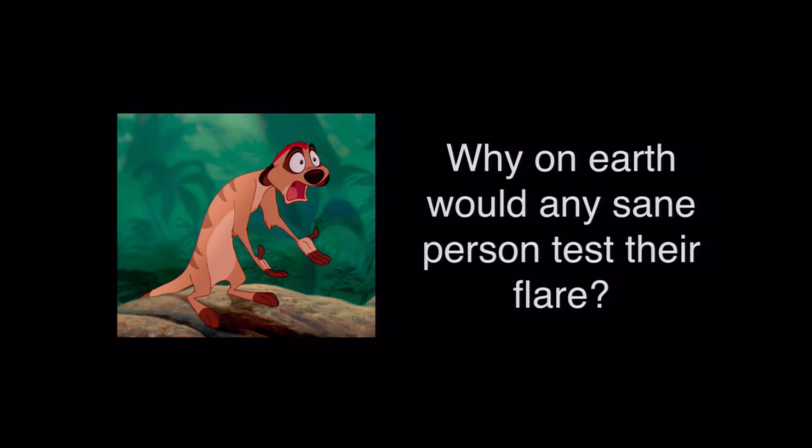Hi, Russ. So first of all, why do we want to do this in the first place? Why do we want to do flare testing? And really the only reason is because EPA has been very actively visiting folks, dropping in on you, and as many of you know who have gotten these 114 letters, they want to know all kinds of information about your flare.

Particularly the requests that we've been involved with, they've wanted to go back 5 years, and they want to know what your steam data is, what composition data you have, all this stuff. And what they do with all that data is exactly the same thing that Derek went over earlier. They take whatever data you have and go through those calculations, and they try, based on the best data they have, to estimate your combustion zone net heating value, your steam to vent gas ratios, to see whether or not historically what you've been doing with your flares.

It came as a surprise to some folks, because if you look at the CFR in 60.18 and 63.11, most of you thought, I'm sure, that I've been complying all along - I've done the things that Derek and Troy had talked about.

And these are the headers, or the sections that are applicable there. Essentially, and I'm not going to go through these because we already did it, there's a visible emissions issue, a pilot flame issue, minimum net heating value, and this is where the difference is. In the past, the focus has been on the vent gas before it gets to the tip. Now the focus is on the combustion zone after the assist media is added. And the other thing they're looking at is exit velocity.

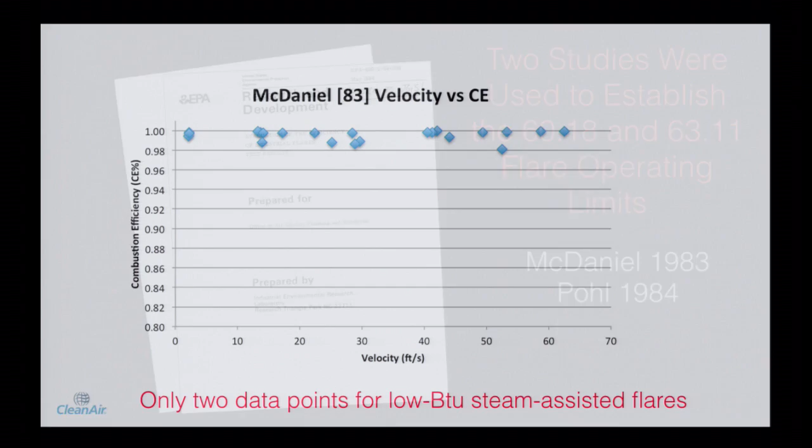There were two studies that took place, and we've talked about them a little bit - McDaniel in '83 and Pohl, who actually did three: '84, '85, '86. He was very active and very busy. And the velocity stuff, as we've talked about, came from this McDaniel and Pohl study. You want to know why we're stuck with 60 feet per second and 300 BTU per scuff - you can blame these guys for doing this.

In all of the data that they collected in these 80s studies - I'm not going to use this because apparently my connection is lost, so I'll go the old-fashioned way here - in all these studies, there are only two data points that were low BTU, steam-assisted tests, which is what we're talking about here. Only one of them was up at this level - you notice we're at 60 feet per second and 294 BTU per scuff, which is close to the 300 we were at. That's the one data point used to establish the 60 foot per second, 300 BTU per scuff limit. One test, one data point, on one flare.

So EPA is always complaining, well, we don't have enough data to allow you to use pressure-assisted flares. Well, okay - one data point on one flare they used to establish a rule that has affected the whole industry for the past 30 years.

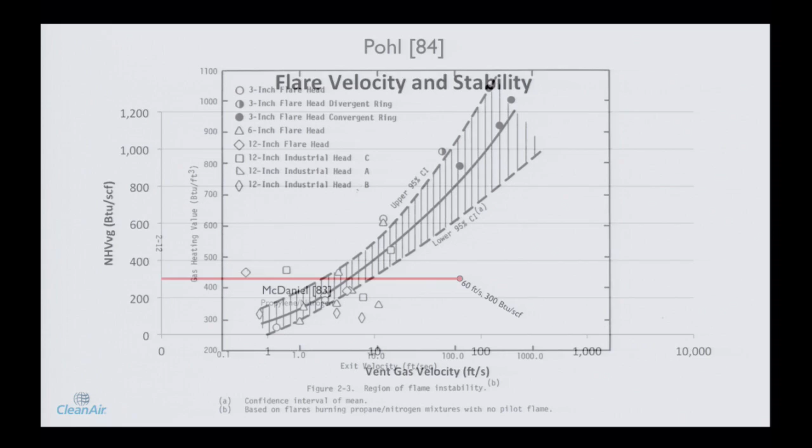So that's where that came from. Then we have this other limit that came from a Pohl study from '84. You've got the limit of 400 feet per second and 1,000 BTU per scuff. Where did that come from?

Well, that came from John's study here. Whoops, go backwards, not having much luck with my technology today. There we go. All right, so this is the data that John Pohl put together in '84.

And you'll notice here are the points that we're talking about. Here's where the 400 feet per second came from. And you'll notice these are the dark black dots. The dark black dots, notice, are a 3-inch flare. This is like a salami-size flare. All right, this is this big.

These were the only data points that they got the real high velocity on, and these are the ones they actually used to establish that other limit, that second number we have for velocity. Again, one data point, one flare, and the limits we're stuck with forever. So there's the Pohl study.

There's the point. All right, so now EPA had a problem. They had this number down here, kind of a minimum down here, kind of a maximum up here. And now they have a gap. Well, what are they going to do about the gap? They can't have a gap. So they addressed that in '86 with a Federal Register notice.

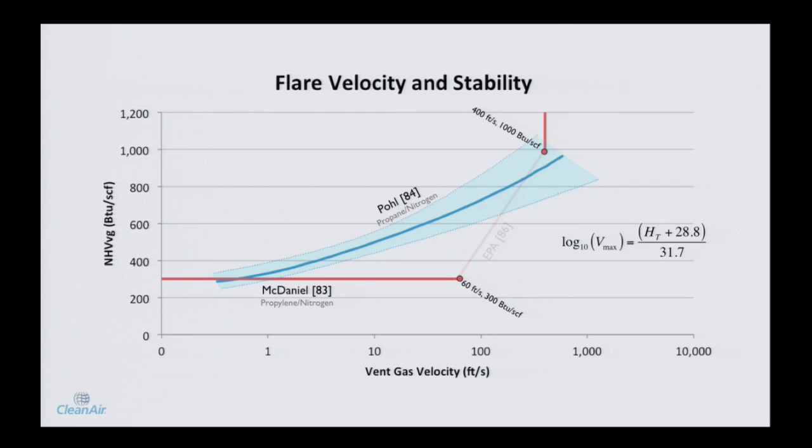And you might have always wondered, and I'm sure all of you have seen this equation in the Federal Register. It's the velocity equation. And you kind of wonder, well, where did EPA come up with this? Is there some thermodynamic thing going on here about flare stability and everything? Well, it turns out that equation is the equation that connects this dot to this dot. That's all that equation is. EPA had a space to fill. That was the equation that filled the space.

Oh no, they knew nothing. All they knew is that they had a space to fill. Yeah, there's no data. There's no data here. There's only one data point here. There's one data point here. So for the past 30 years, our lives regarding flare velocity have been governed by these two data points.

So the conventional wisdom has been, as long as you're in this area, this is the safe area here. This is stability and goodness and high combustion efficiency. This is good. But if you get into the blue area, the assumption is, well, you're unstable. You can't operate there. You're at 63 feet per second. That's no good, I'm going to fine you. So that's been the traditional approach.

But there's actually no data, or until recently, there's been no data up in this area at all, nothing. And there actually was no data. If you look at McDaniel's dot here, that was at 99% or so. This was at 99% or so. So even the data that they had at the edge of this line showed super high combustion efficiency. It's not like they were approaching a cliff or something that they had to protect us from. They were at 99.9% up there.

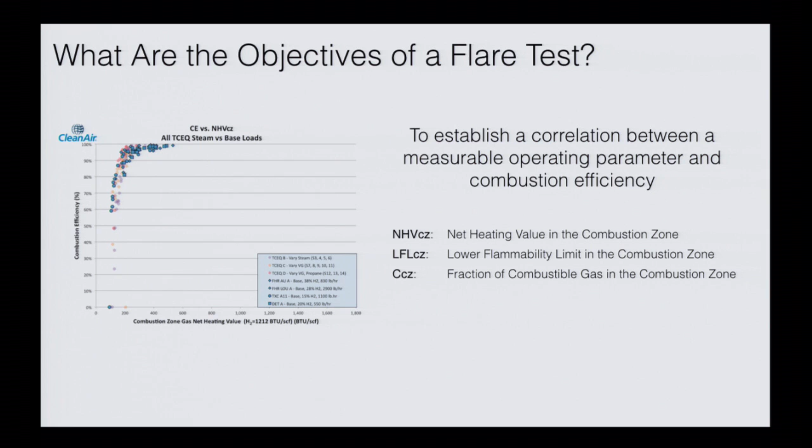Now you notice here where this drop-off happens, around 300 BTU per scuff on a steam-assisted flare. This is what we found very consistently for all the flares we've done, except when we get to this hydrogen olefin thing - but I'll talk more about that tomorrow, not today. So aside from that aberration, the results are remarkably consistent.

So what we need to measure here then - oh, I do have this in there somewhere - steam flow. Obviously we need to know how much steam is going to the flare, and this is usually what we found, that in most of the places we've been, there's some mechanism for measuring steam.

Most places have an orifice meter or something we can use to measure steam. Vent gas flow, on the other hand, has been trickier. I'm amazed at all the folks that don't have any means right now of monitoring vent gas flow. This is particularly true, I guess, now in the chemical industry. We found a lot of olefin plants and everything really are not measuring vent gas flow at all at this point. So we've actually had to bring in these optical flow monitors, plug them in, and get an estimate of vent gas flow during the test.

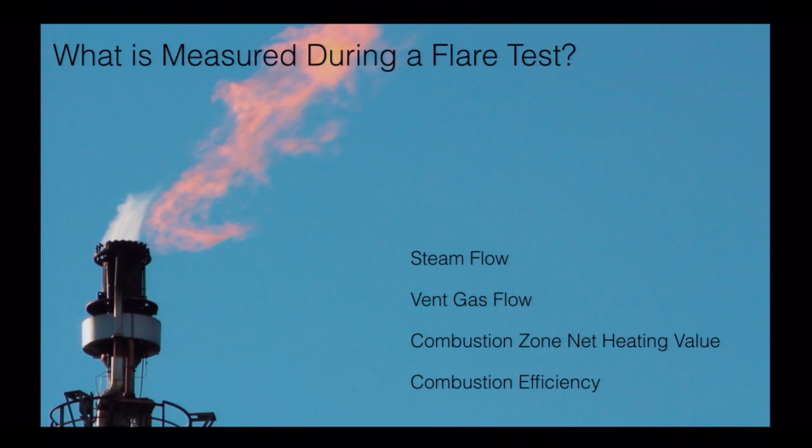So monitoring steam and vent gas flow - I'm not going to go over it again since we've talked about this ad nauseum - but we have an ultrasonic meter, orifice meter, optical meter. We have this COSA optical flow meter that seems to work pretty well that we bring in if there isn't one. Vent gas composition, gas chromatography.

We've done one test where they were taking bag and canister samples during the entire test. That was an interesting time - there's a lot of samples. I'm sure the lab we took it to was very happy.

Say it again? I was confused. Vent gas composition. Yeah, I was confused. Oh, what? I was thinking we were getting bag samples on the flare plume. No, so far we're only talking about the vent gas here.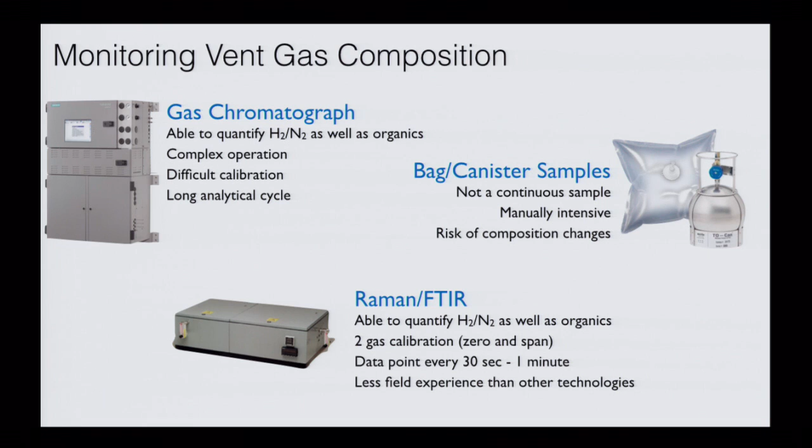Now, one thing I found that's actually been fairly handy - I don't have any connection to these people - but we found a nice hydrogen analyzer that we've been using. It's called H2 Scan, it's like $5,000, a very cheap instrument. It's Class 1 Div 2, very fast, very accurate. A couple of downsides - it needs a conditioned sample, so you can't, we found that out the hard way, actually.

It doesn't take well to a lot of water, and if you have a lot of CO, you can't use it because CO poisons the sensor. But the two problematic compounds are always hydrogen and nitrogen. If it weren't for hydrogen and nitrogen, we could just slap an FTIR on there, as Bill told you, and we could get real-time data on vent gas composition, but we wouldn't get any hydrogen and nitrogen, and we absolutely need that. Without even a Raman, this solves the hydrogen problem for us nicely. We still had that nitrogen problem, which is where the Raman came in.

And so the testing itself is done by this passive FTIR instrument. Now, this is different than the FTIR we're using to analyze the vent gas, that's a cell-based, it's like a CEMS, there's a sample line, it sucks the vent gas out, it puts it in a cell, the FTIR does its job, and we get a number. The passive FTIR is a passive instrument, and that's the kind of neat remote sensing piece that we do to actually get the combustion efficiency.

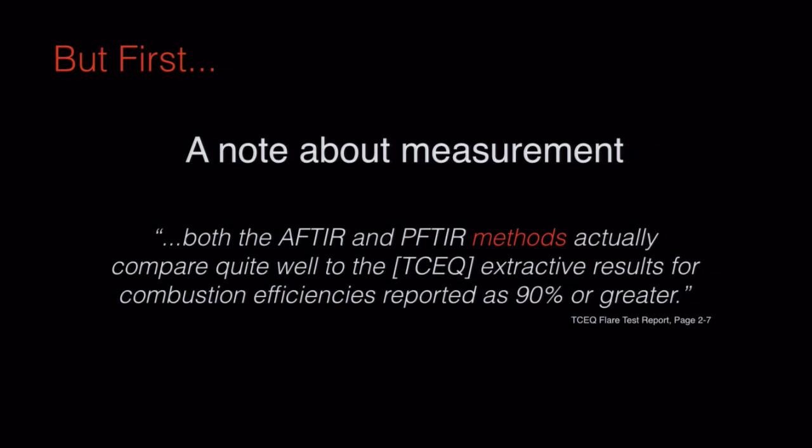But first, a quick note about measurement. I believe this was from the TCEQ report. They claim that both the AFTIR and PFTIR methods actually compare quite well to the extractive data from the TCEQ test. And the key word here is methods. So passive FTIR, what we do, the instrument itself is not a method, it's a technology. If you were to put a telescope on an FTIR and start taking readings, chances are you're not going to get good results. There's a lot that goes into this. Dr. Bob Spellicy from IMACC has worked tediously over the years to perfect this and to get it to a point where we believe the results. So it's not just as simple as taking measurements. There's a lot of things that go into this.

There's a detector. Right now we use a dual detector so we can see a broader range of the infrared regions. Bob has worked to figure out which regions we need to look at in detail to determine CO2 and all the other compounds in the exhaust. There's also the calibration, the aiming, how the backgrounds are done, and how you treat the data after it's done. That all is incorporated into our technique, and that's what we've been using to analyze the data.

So the method is essentially what was used for basically everything after the TCEQ tests in 2010. That's the method that was validated next with the extractive data that was taken there. We'll talk about that a little more in a few minutes.

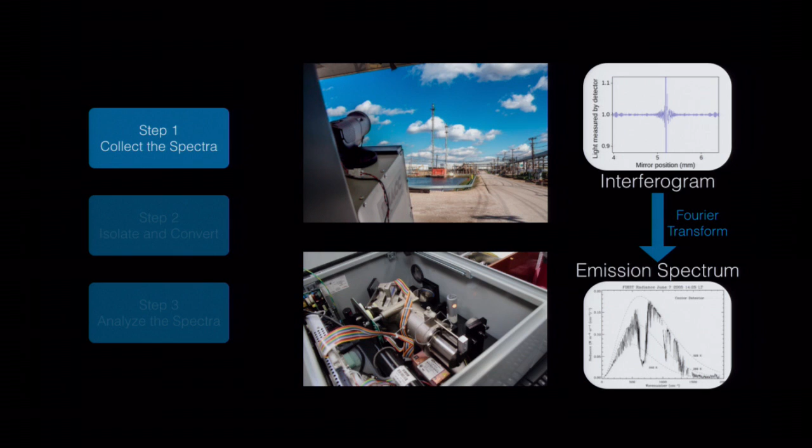Now what's actually all contained in that emission spectrum? It's not just the flare, right? We're actually looking at what's behind the flare in the sky, the air between us and the flare exhaust, which we want, and even the instrument itself gives off a signal. So we want to isolate that flare radiance during these tests.

We do that through a series of daily calibrations. Every day in the morning, we have basically a telescope with a little hole on the back where we can put different calibration sources in and fill the view of our passive FTIR instrument with something like a black body source, an IR source, or liquid nitrogen for a zero. That allows us to filter out some of these extra components that we'll see in a spectrum.

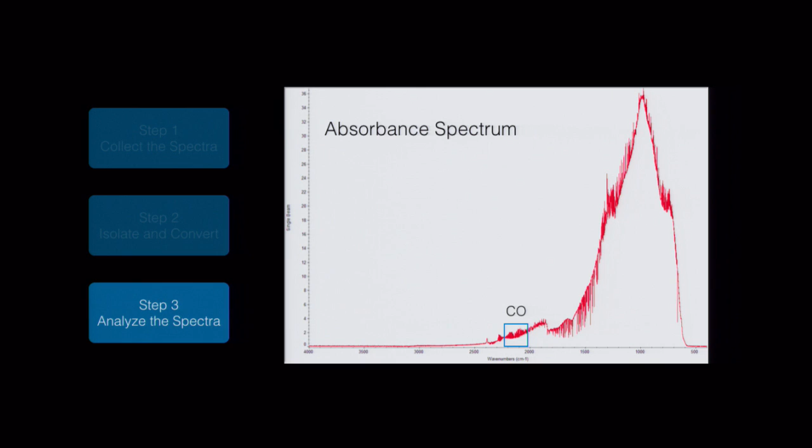So here's an absorbance spectrum. You can see where CO is. After we have this collected, the IMACC software that Bill talked about, with the dynamic references and some of the other linearity and fit features, is used to analyze the spectra.

Now the passive FTIR does have a few limitations. We're measuring concentrations in ppm meters, as we call them. The reason we have to do that is because we're aiming through the exhaust of the flare plume, but we don't actually know the depth of that exhaust plume. There's a lot of turbulent mixing going on, and by the time everything's finished burning, we don't know how deep that plume goes, so we don't know the spread of the components across that section. So we can't determine absolute concentrations or mass emissions with the passive FTIR.

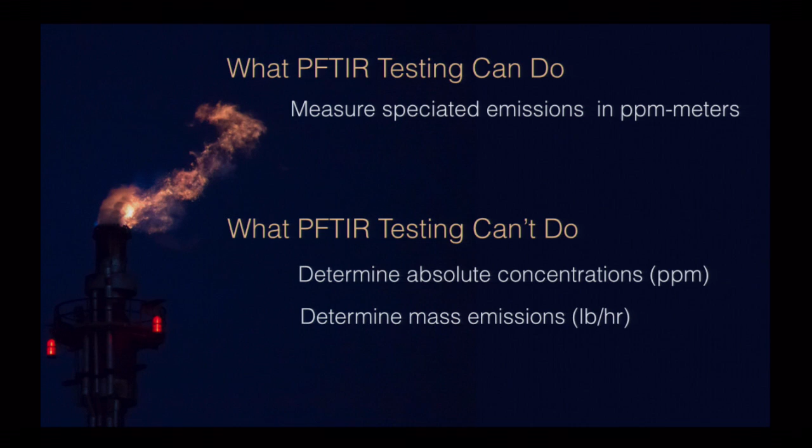What we're measuring, you have to remember, is just the ratio of CO2 to hydrocarbons. Units are in concentration times path length, and we don't know the plume depth. This is particularly important to remember for the flare AP42 discussion - EPA took a lot of this passive FTIR data and attempted to turn it into absolute concentrations and absolute mass emissions. In order to do that, they made all kinds of assumptions, some of which are pretty questionable. EPA obviously did not heed this particular point, that there is no quantitative speciation with the passive FTIR.

So, validation testing.

Let me talk briefly about the TCEQ test. There were a bunch of different vendors there trying out their various technologies and methods of using those technologies, and really the only one that worked was the passive FTIR.

The gold standard for that test was this extractive probe designed by, I believe, Zach Kodesh at John Zink. What happened was pretty crazy. I saw it done at a different test - I wasn't at the TCEQ test, but we did some other testing there, about a year and a half ago.

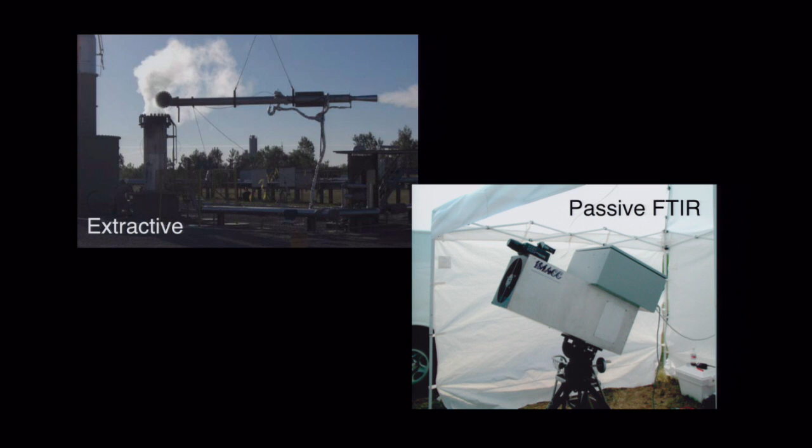What we saw at TCEQ was pretty much the same thing we'd seen in tests conducted prior to that. You're humming along at high combustion efficiency until you hit this cliff point at around 300 BTUs per SCF in your combustion zone, and then you fall off.

But the aspect that was most interesting to us, and gave us confidence that these numbers actually reflect what's happening, is that the extractive method conducted with that John Zink ear trumpet gave roughly the same results as the passive FTIR, and in fact the trends are identical.

There's less agreement as you get down lower - the variability increases across replicates in both methods, both the extractive and the passive FTIR method.

So a typical test: if you're fortunate enough to talk to us, we'll start by discussing what exactly you want to know about your flare, and we'll design a test matrix to give you some answers.

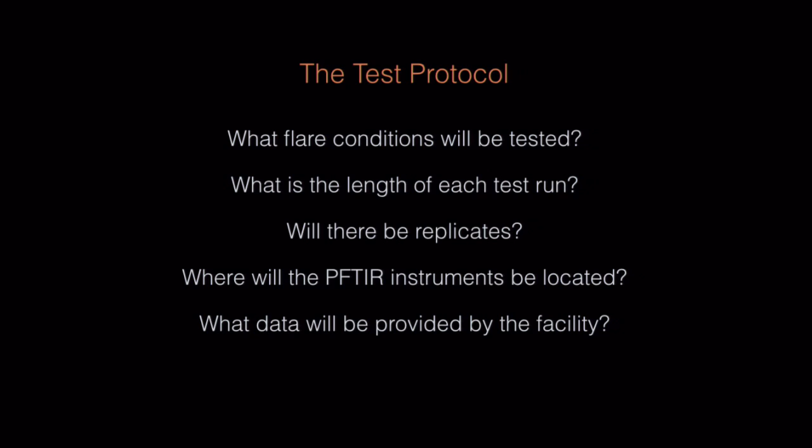So during a site visit, we'll also figure out where we're going to place these instruments. And Scott talked about what data the facilities usually provide, so we can correlate the combustion efficiency data we collect to some sort of operating parameter.

So your minimum test run is 10 minutes? If it's a test EPA wants done, it's going to be 20 minutes, and they like to see 15 valid data points - that's 15 points where we have a good view of the flare exhaust from the instruments.

If you have a run where the wind is blowing all over the place, changing directions and speeds, it might take a little longer, but usually we don't have that issue.

What do you consider stable vent gas BTU, like two GC cycles? Yes, usually 2 GC cycles before, and unfortunately if we're using a GC, by the time of the turnaround, it's about 15 minutes, so you only get 2 points during a test.

Now, the last test we did was really nice. We did it with Dr. Pierman, and we knew instantaneously, almost within a minute, if something was happening with the process. So that was nice.

So we get, like I said, you want high data transfer capabilities between the two trailers, so you'll need some sort of Ethernet or optical cable. We need clean power—I prefer generator power. Just personally, get a big generator, that way you know it's steady.

We had one test where clearly it was not clean power. There were all kinds of surges. One guy was sitting there getting shocked every time he typed on his keyboard. Needless to say, the computers were fried by the end of it, and we were changing out motherboards and instrument electronics. The facility was kind of in the middle of nowhere, so we had to drive 2 hours one night and back to get more computers because ours were all fried.

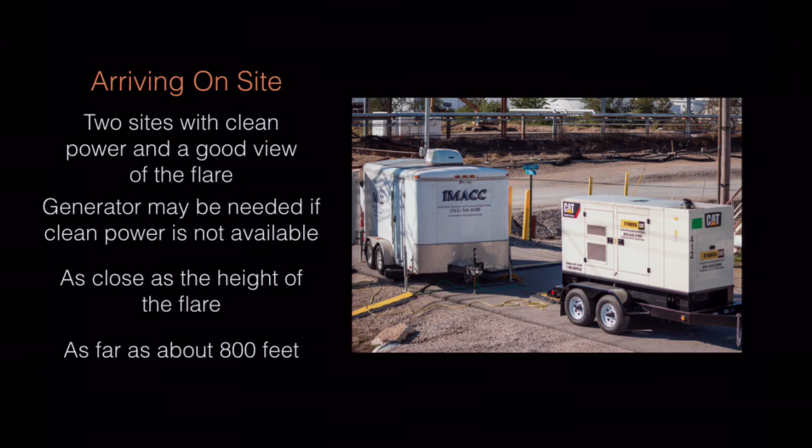So we set up our trailers approximately the same distance, or that's the height of the flare, because we want to be looking at a 45-degree angle optimally. But we want to stay within 800 feet, because eventually you lose the signal over that long of a distance.

Another thing we do during tests is, if your facility has a control room where we can all sit and look at the data, that'd be great. But if not, we can bring another trailer. We'll set up a big screen TV with a bunch of video feeds from each instrument location, and you can watch the process data. Someone from the plant will be there, so you can watch that in real time and see how it reflects the visual characteristics of the flare or the IR image.

It's pretty cool. At each location there are 3 cameras: an infrared camera, a visible camera, and an aiming camera that's actually on the PFTIR. It shows you exactly where the flare plume is pointed.

So at a 2-location site, this is why you need optical cable—the bandwidth is fairly large to get all those video images to a central location. The idea is if there are any glitches in the data, we want to know what was visibly going on with the flare during the glitchy data, in addition to having the process data.

Okay, so arriving on site, we also have these calibration carts I talked about. It's basically inside that box where you can see the two guys working—it's basically a telescope, and we want to set that approximately the same distance that the flare is from the instrument, because that will more accurately reflect any transmission losses in the air between the instrument and the flare when we're collecting the emission spectrum.

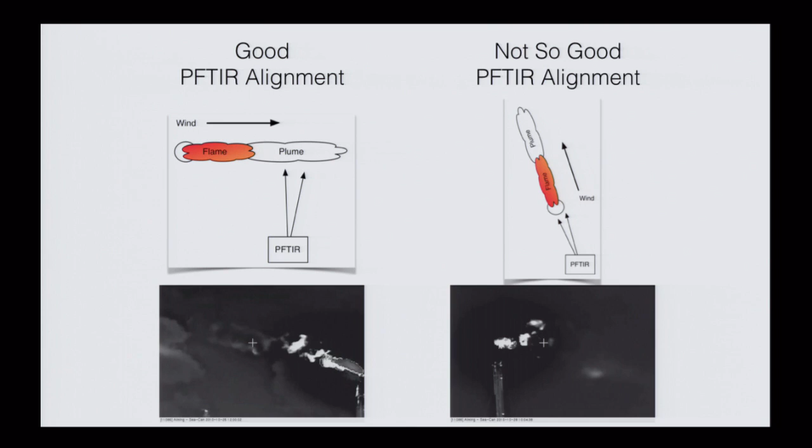This is a windrose plot, and I'll use these after I get back to my desk to find the minutes of the test where the data was collected in that blue, bad region. That's your own met data — usually plants have wind data just for safety reasons, like releases, so people know where to go. We'll use that data supplied by the plant as a good check, and a lot of times if there's a funny point in our combustion efficiency measurements, it'll be correlated to a minute where the wind is not optimum.

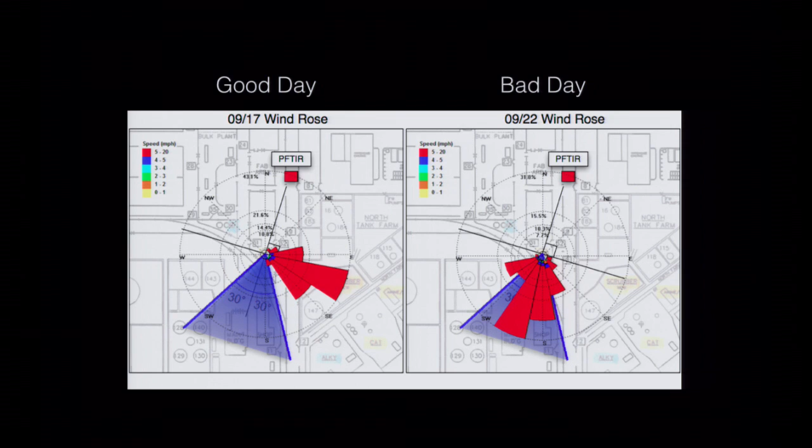During the test, we either have one or two engineers in a trailer — one making sure all the mechanical things are working and aiming the instrument, and one person crunching the data, making sure the spectra and everything look good, and conveying that back to wherever the plant people are.

We do field calibrations every day — here's another view of our telescope. Sometimes the hardest thing about figuring out where to place our instruments is that we need a long, straight aiming region on the ground to do the calibrations. It's pretty easy to just aim up; you can shoot over most things. But getting a clean view of our cart from a long distance can be hard in an actual refinery, so you'll have to close down the road for a few minutes while we take a measurement. Everywhere we've gone it's been pretty doable — we've been able to reroute traffic for a few minutes or whatnot.

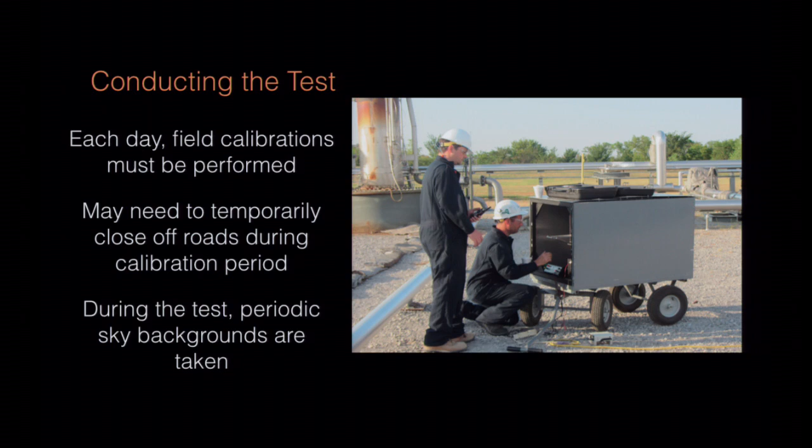During the test, before and after each run we're splitting off the flare and taking backgrounds of the sky just to make sure it hasn't changed, so we're getting the right radiance removed from the emission spectrum based on the sky conditions. If a big dark cloud is moving in during the background, we'd be aiming at that cloud — ideally, yes. And if that happens during the test itself, not necessarily a problem, because on our post background we'd take a background of the cloud, and during post-processing we'd figure out which minutes need a sunny background and which need a cloudy background.

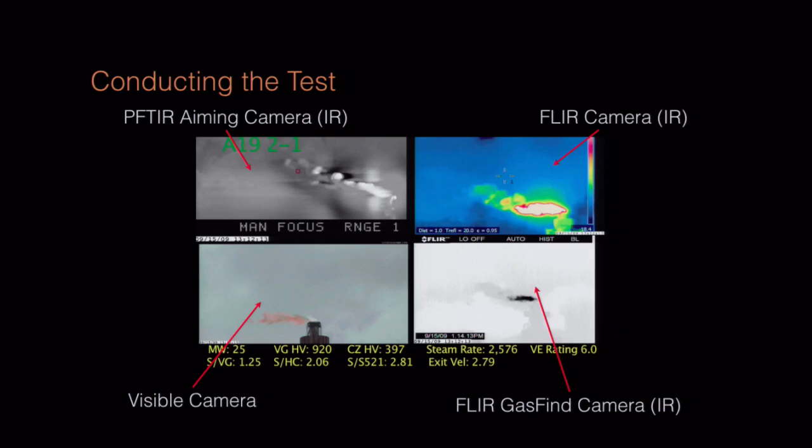We talked about all this data that needs to be arranged, and it's easier for me if I can arrange a format in advance. That way we can just set up spreadsheets to calculate everything in real time and get you the results you want right away. This is sort of what the TV screen will look like in your control room or war room or whatever you want to call it — you'll be able to see feeds from several different cameras simultaneously, along with process data.

So, keys to a successful flare test: if you find yourself having to conduct one of these, get everyone involved early, from the plant manager all the way down to the operations folks, and let the electricians know we're there, so we're not sitting around for a few days. We have a lot of downtime during these tests while we're waiting for the flare to achieve the stable condition we're trying to test, because some operations people are only used to adjusting the steam. They're trying to make sure certain compositions are targeted and hit, and if they haven't practiced that before, it can be difficult for them to do quickly. So I'd recommend having your operations folks practice.

Calibrate your instrumentation. We found out, as someone mentioned earlier, on one of the tests that there was an 80% difference between what the flow meter was saying and what Tracer Co. came in and told them the flow was. At first we thought they had a completely magic flare, but it turned out to be just like the rest of them. Yep, and I think that's all.